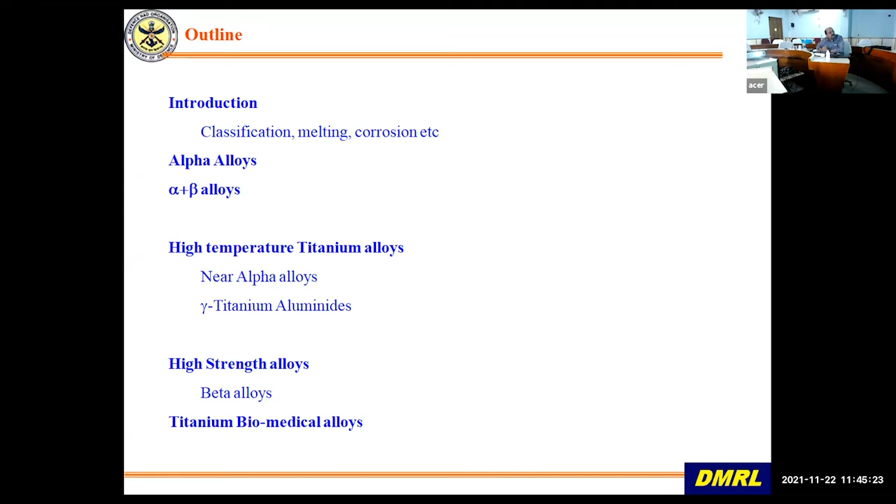And finally, if I have time, I will also briefly introduce titanium biomedical alloys, because that is also one field of research which is coming up.

As far as titanium goes, it has two principal virtues: high strength to weight ratio and good corrosion resistance. That is the reason you find applications in lot of industries like aerospace, including airframes and engine components. Due to its good corrosion resistance, it also finds usage in marine, chemical, and biomedical applications.

There are certain other niche applications which are not very common, but still they are there, in industries like aerospace, medical, industrial, and certain specialist industries which are coming up, like body jewelry, marine, bicycle, and also sports equipment.

As far as the percentage usage goes, non-aerospace accounts for 47% of the total production, and aerospace is 53% of the total titanium alloys.

As far as titanium goes, it is basically extracted from its oxide, which is available a lot in the Kerala beach sands, and this titanium oxide is very stable. As a mineral, it occurs as rutile and ilmenite.

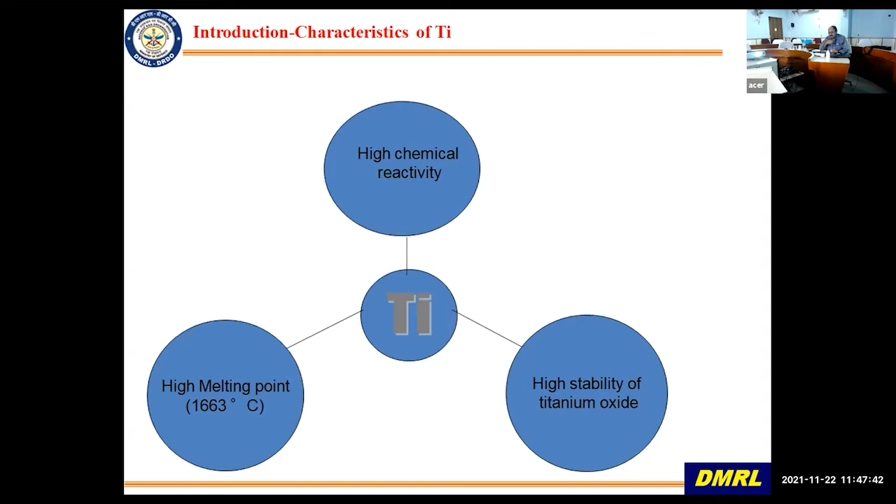This technology in India has been developed by DMRL, and now a plant has been set up in Chavara, Kerala, with a capacity of 500 tons per annum, where titanium sponge is being produced.

Now, coming back to the titanium alloys, here I'm just showing you how the classification is done. The alloying elements are basically divided into two categories: the alpha stabilizers and the beta stabilizers.

Coming to beta stabilizers, there are two kinds: beta isomorphous, which are elements like vanadium, moly, niobium, tantalum, tungsten, and beta eutectoid stabilizers like iron, chromium, nickel. And among the gaseous elements, hydrogen is the element which stabilizes the beta phase.

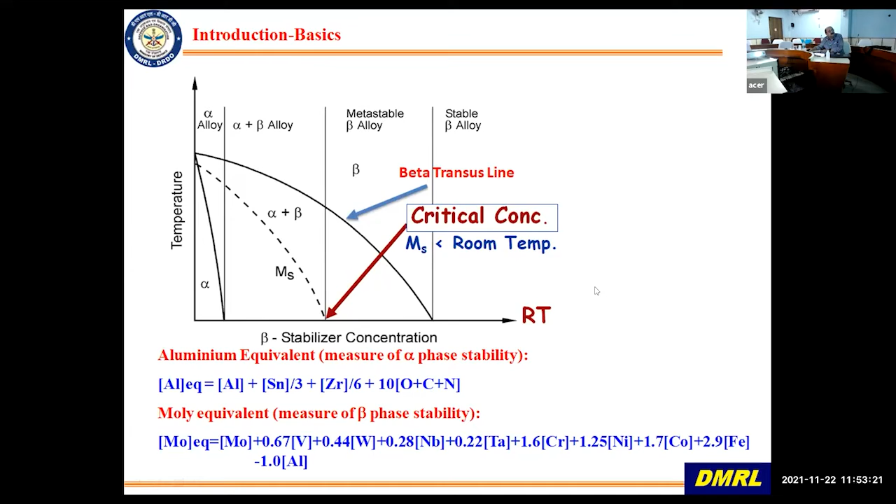So here again I'm showing you examples of certain commercial alloys. All the alpha alloys like 5 aluminium, 2.5 tin, and there is also commercial purity titanium, which is an alpha alloy. Then there are other examples of alpha alloys, and in this category, alpha plus beta alloys, which you can see. I will show you again.

One of the important alloys I should point out is Ti-6 Aluminium-4 Vanadium, which is an alpha beta alloy, and around 50% of world titanium production is of this alloy, because it is medium temperature capable with good strength, and it is used widely in many places. Then you have the metastable beta alloy, Titanium, 10 Vanadium, 2 Iron, 3 Aluminium. Then there are other alloys also.

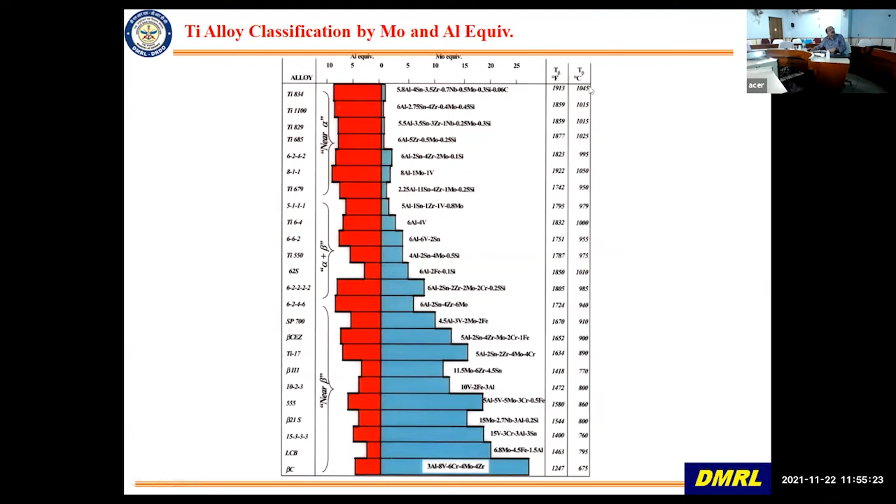So on the top side, you have the near alpha alloys, which is a subcategory of alpha plus beta alloys. This category we'll be talking about in detail. This is part of the alpha plus beta alloy. You can see you have a higher aluminium equivalent and a very small amount of beta phase in the near alpha alloys. Then as you go down, the amount of alpha stabilization decreases and beta stabilization increases. Also, the beta transus temperatures are indicated here for several commercial alloys. You can see that as you come down from near alpha alloys to beta alloys, the beta transus temperature is also roughly going down.

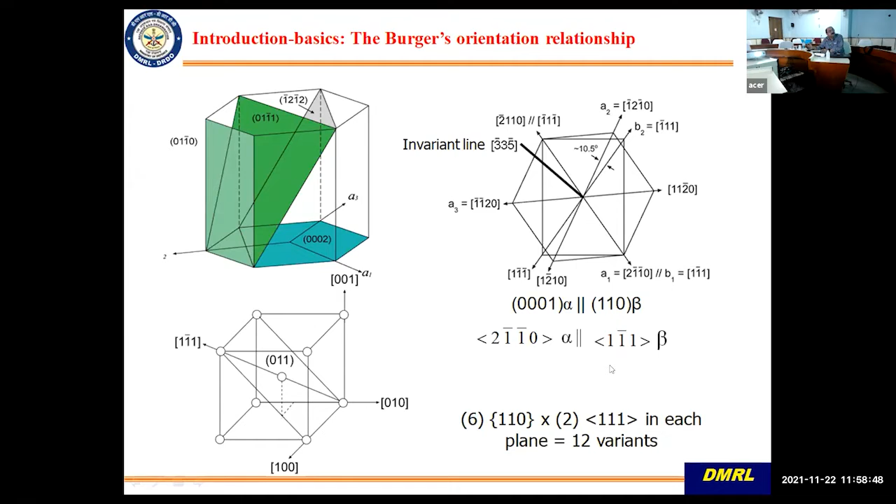Now I'll introduce some of the heat treatments. First is homogenization heat treatment, normally done to all solidified ingots. It is heated high up in the beta phase regime, around 1100, mostly higher than 1100 to 1200, 1250 or so, basically to homogenize it and prepare it for forging. If there is any chemical inhomogeneity, it also evens out. Time and temperature are decided depending on the alloy and other factors.

As far as solution treatments are concerned, there are two kinds. One is beta solution treatment, normally carried out in the lower beta phase regime, but still in the beta phase. Then there is alpha plus beta solution treatment, carried out in the alpha plus beta regime.

Then you have aging, which again is carried out in the alpha plus beta regime, but lower down in temperature, roughly 500 and below. It can go up to 600, but it is normally at lower temperatures.

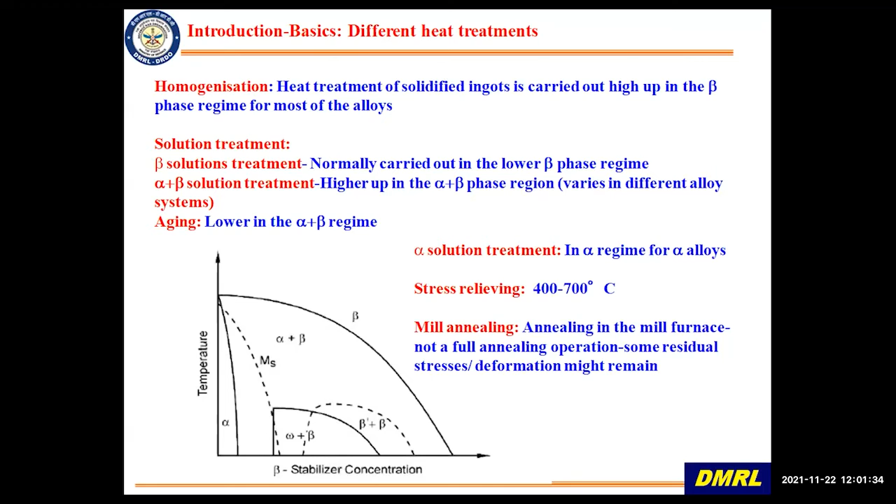The other important thing you should all know is the globularization of alpha in titanium alloys. As I told you, alpha occurs alongside beta, and they occur as needles, or depending on the cooling rate, they will be thicker or thinner.

This is a very important treatment. Suppose you want to convert alpha from the lamellar structure to a globular structure, it cannot be done just by heat treatment as in steel. Normally it occurs as laths, like martensitic laths in steel, with alpha and very thin beta around it. So what you have to do is perform deformation in the alpha plus beta temperature regime, when formation of slip bands occurs.

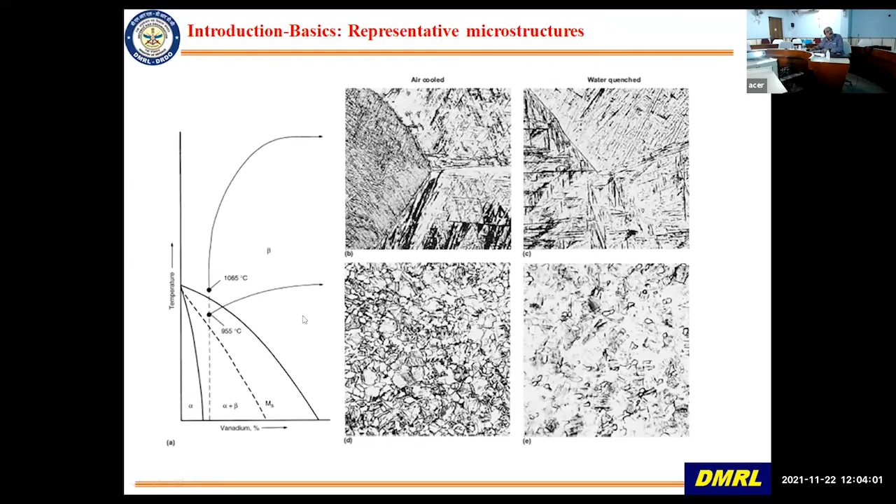Now here again, with Ti6Al4V, when you beta heat treat and cool from the beta region, you get this kind of colony structure. You can see different colonies of alpha and the geometric pattern. This bright thin layer is beta, and the darker regions in between are alpha.

You can also see grain boundary alpha formation, because grain boundaries are high energy regions, and alpha first precipitates on these boundaries, which deteriorates the mechanical properties. So you have to take care of it.

Now if you give deformation to this beta treated material in the alpha plus beta regime, and then cool very slowly, what you get is an equiax structure. You can see dark colored alpha and continuous beta lining the boundaries. This kind of microstructure is very good for superplastic forming applications or forming applications in general.

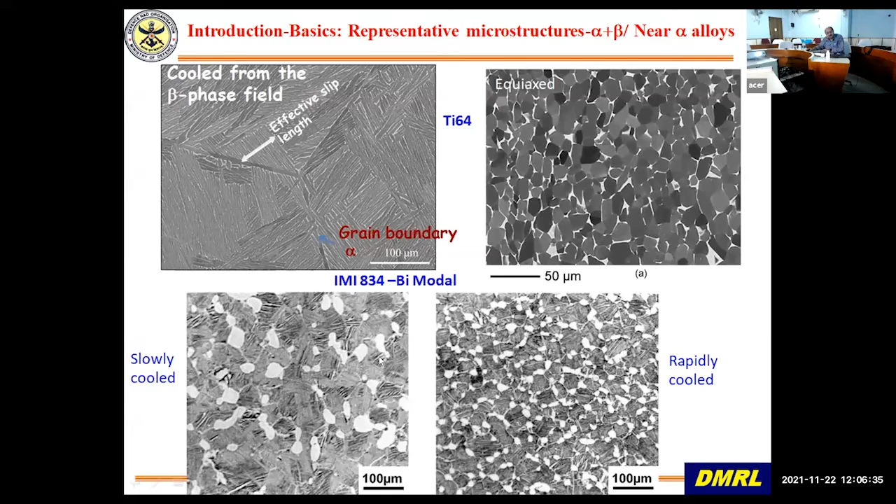Now I will just briefly talk about how melting is done, because some of you might not know. That is why I thought I'll go through the basics and then go on to the main topic. Titanium picks up oxygen and nitrogen, etc., that is present in the atmosphere.

So it has to be melted in vacuum. What you do is melt it in a vacuum arc remelting furnace. You make an electrode, and there is a water cooled stinger rod to which you attach the electrode, and then you have a water cooled copper crucible with water around it, and a stirring coil around it.

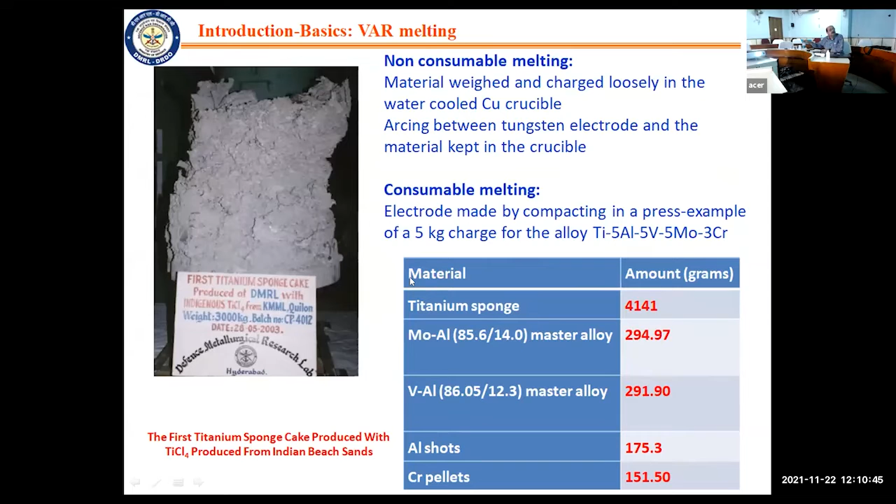The other important thing about titanium is it has got very good corrosion resistance because it exists at the noble end of the galvanic series. This is a galvanic series in seawater, and titanium exists towards the noble end.

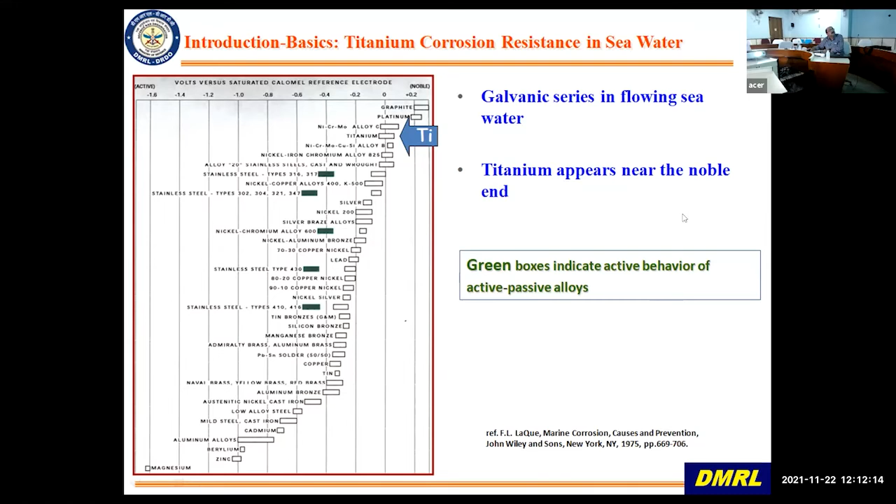Just like aluminium, it forms an oxide layer which protects. Although this oxide layer is not as tenacious as aluminium's, it still protects. So it has got very good corrosion resistance, that is why it is used in a lot of marine applications and also chemical industries.

Now, as I told, the thin protective layer of TiO2 on the surface forms and protects it, but it is good in oxidizing environments, that is in chlorides, hypochlorite, sulfates, and chromic acid solutions, but is not as good in reducing environments like sulfuric acid, hydrochloric acid, phosphoric acids, etc.

And in order to improve it, you can do palladium additions, which increases the corrosion resistance.

Titanium and titanium alloys are slightly different as compared to steel, because they are melted in vacuum and the materials are very pure, with no inclusions. So there is no pitting corrosion that happens. But local chemistry changes can dominate the corrosion behavior, and you can have crevice corrosion. I will just briefly show you that.

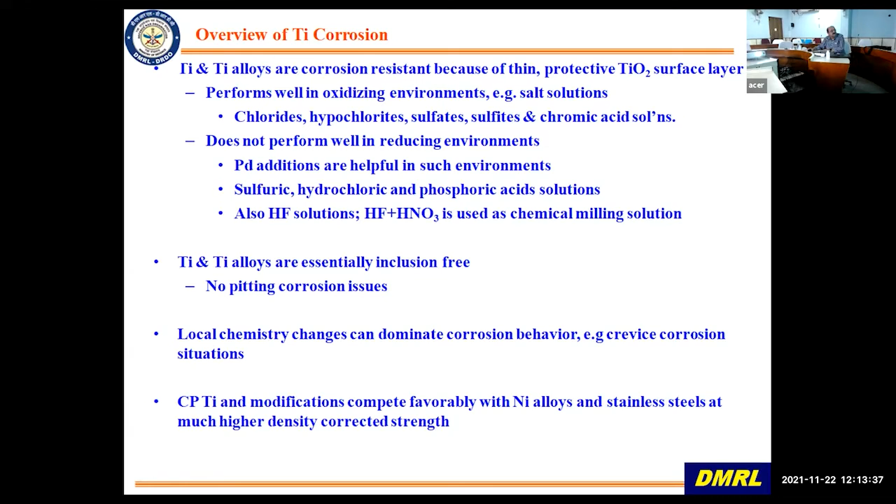CP, commercial purity titanium, with additions like palladium etc., competes very well with nickel based alloys and also stainless steel as far as density corrected strength is concerned. But the titanium alloys are quite prone to crevice corrosion.

That is, all the alloys that have a thin protective layer - when you put two surfaces together in close contact, and there's a liquid environment, a cell can form and corrosion can start, because this cell does break down the film, and that creates what is called crevice corrosion. So titanium is prone to crevice corrosion, but other kinds of corrosion are less in titanium. So you don't have rusting of titanium as in steel or iron.

Now coming to the alpha titanium alloys class. These have moderate strength and good fabricability because they are single phase, and have got very good corrosion resistance. Certain modifications have been done, which I already pointed out, like palladium bearing alloys which are good for reducing environments.

So there are usages like making electrodes in electrolytic baths, or electrowinning of some materials. These titanium electrodes are used.

As far as the grades go, there are about 16 grades of commercial purity titanium and alpha titanium alloys in the US and other industrial countries. These alloys, being single phase alloys, are non-heat treatable - that is, you don't gain strength by heat treating. But certainly you can do stress relieving and all.

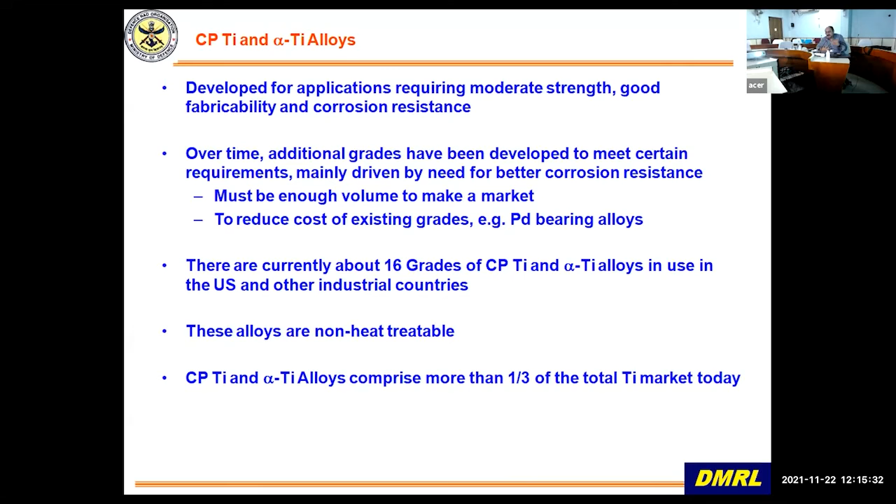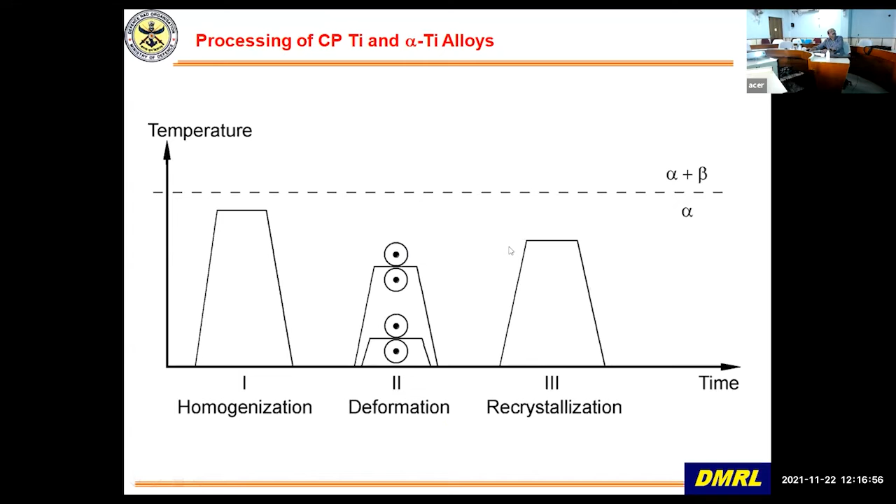I will show you how the alpha titanium alloys are processed. It is homogenized high up in the alpha regime only, then deformed in the alpha regime, and then recrystallized again in the alpha regime, slightly higher than the deformation temperature. That is how these alpha alloys are processed - completely processed in the alpha regime.

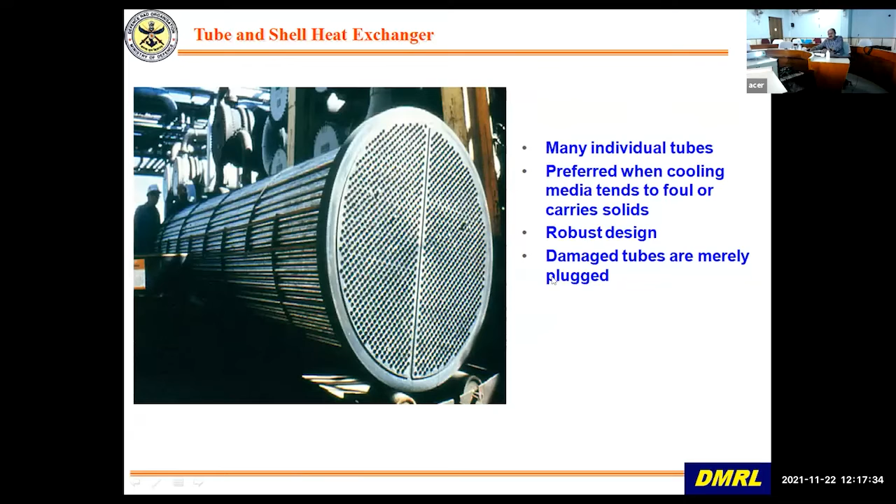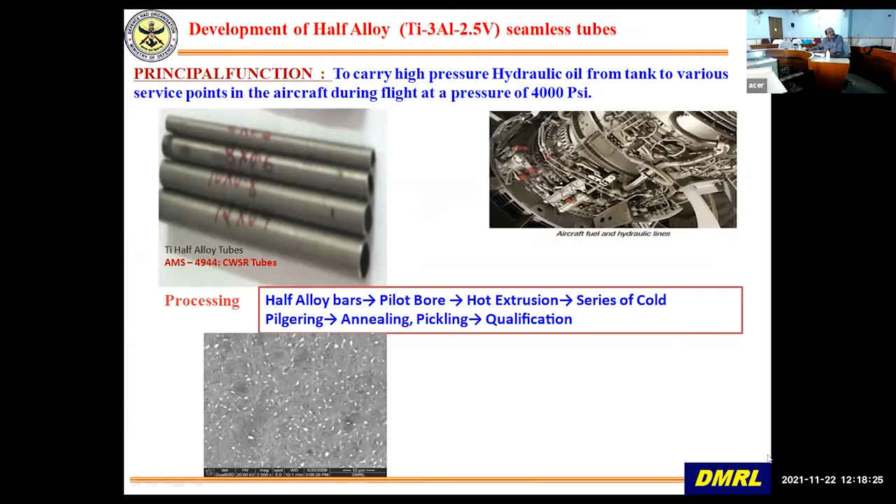This is used for hydraulic oil carrier tubes in aircraft. You can see there are miles and miles of these tubes in an aircraft, with various thicknesses and diameters used, and produced indigenously also within Midhani and NFC, which makes tubes. This is how it is processed: half alloy bars are melted, then pilot bored, hot extruded, series of cold pilgering, annealing, pickling, and then qualification tests are done. Just showing you the tubes of various diameter and thicknesses.

Now, I'm not going into too much detail of alpha alloys. Then comes the bigger category of alpha plus beta alloys. Here are some examples of the alpha plus beta alloys.

This alloy, for example Ti6Al4V, comes in two grades. One is the normal grade, which has got higher amount of oxygen, and then a grade which is called the 6,4 ELI, which has got lower amount of oxygen, 1300 ppm of oxygen. This is for formability and cryogenic applications.

Then comes the category of high temperature titanium alloys, which are near alpha alloys. 6242 is one of the high temperature titanium alloys that Americans use, and for the Kaveri engine program we have indigenized this alloy. This is a slightly later and more complex alloy, and it has also got higher temperature capability as compared to the other one.

This can be used up to a maximum of 500 to 525 degrees centigrade, while this other one can go up to a maximum of 550 to 600 degrees centigrade temperature. These are older generation alloys: 811, IMI 685, which was used in older engines, etc.

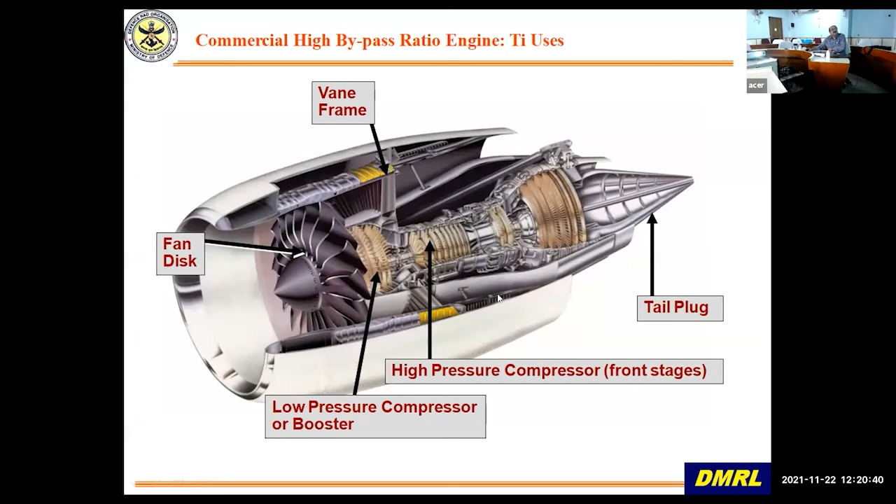Nowadays I will talk briefly about aluminides. They come in here, and these aluminides, which are intermetallics, can replace nickel-based superalloys. Otherwise these are nickel-based superalloys. Then there are certain alloys which can be used for engine tail plugs also.

How is this alpha plus beta alloy produced? These are processed. Just one second, let me check if I can hide this.

The ingot, as I told you, is heated up high in the beta phase regime. That is called homogenization. Then you can cool at different rates. Deformation is first carried out in the beta and then in the alpha plus beta regime if you want a bimodal kind of structure. Otherwise, if you want a beta treated structure, you can just do deformation here and then annealing or recrystallization here to get a beta treated structure. But if you want a bimodal structure and want to refine the grain size, you deform in the alpha plus beta regime and then carry out recrystallization and annealing again in the alpha plus beta regime, and then a final aging or annealing much lower down to get higher strengths.

So here again is the same microstructure. This is a beta treated structure, it has got big beta grains because the diffusivity in beta or BCC is higher, so you get large grains. Whereas in equiax or bimodal structure, you get much finer grain size. So for fatigue kind of applications, this kind of microstructure is much better, and this kind of equiax microstructure is good for formability applications.

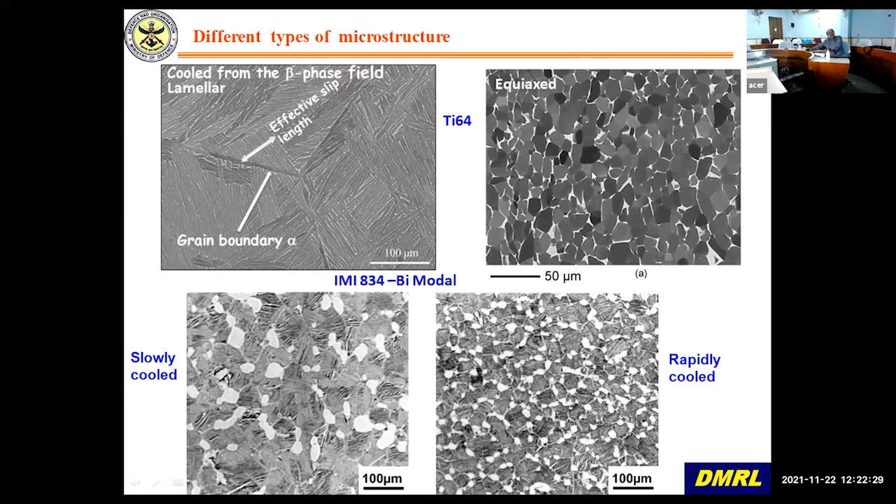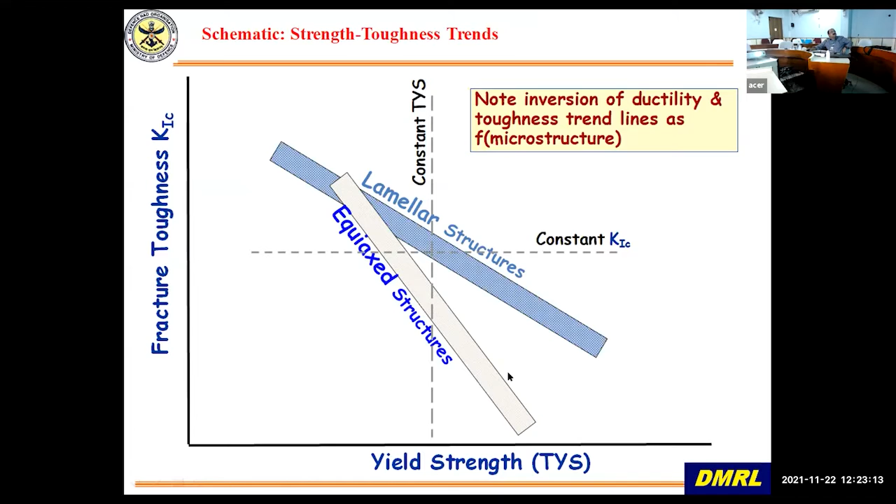Now coming to near alpha high temperature titanium alloys, because these exist toward the left hand side of the alpha plus beta phase diagram, what is the design philosophy for high temperature? We are mainly looking for creep and oxidation resistance. So what you have to do is basically limit the beta phase volume fraction, because beta phase, being BCC, has higher diffusivities, giving worse creep properties. So you have to decrease the beta phase content, normally kept less than 10 volume percent, which is why you have to have lower beta stabilizer content.

Then how do you strengthen it? You add neutral elements, tin and zirconium.

Tin combines with aluminium, and it can also precipitate alpha 2, which is the ordered Ti3Al structure, which increases the strength, high temperature strength and all. So it is good for that also.

As I told you, you replace the higher diffusivity beta stabilizer. You have to add a certain amount of beta stabilizer. Instead of using vanadium, you can use moly or niobium, which have higher melting points and lower diffusivities. That is why in high temperature titanium alloys, you will see more of moly and niobium.

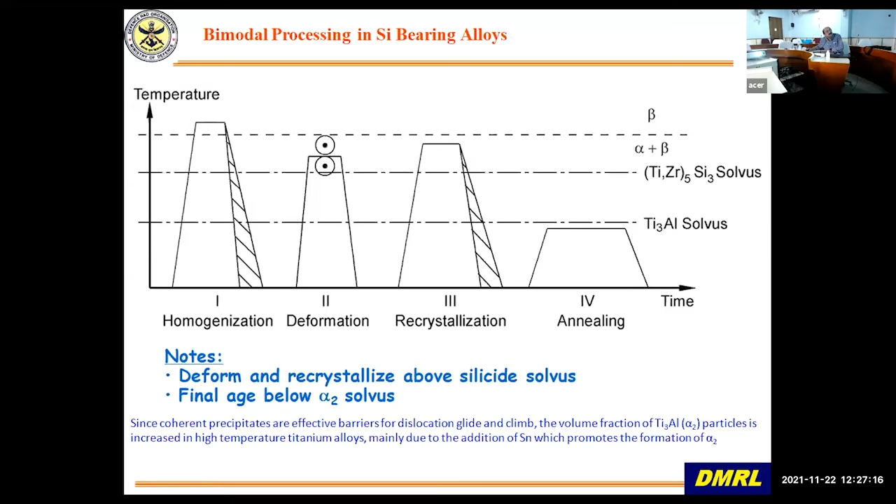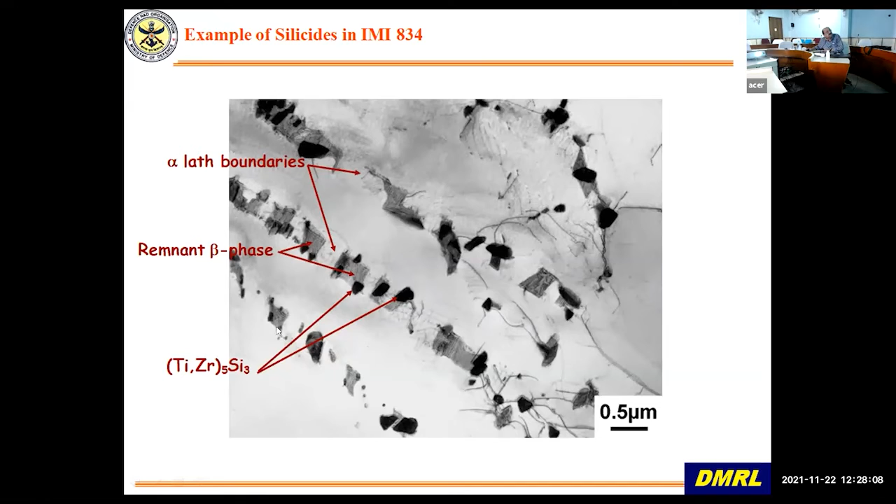That is why in most high temperature titanium alloys, you will have silicon as one of the additions. It improves the high temperature creep property.

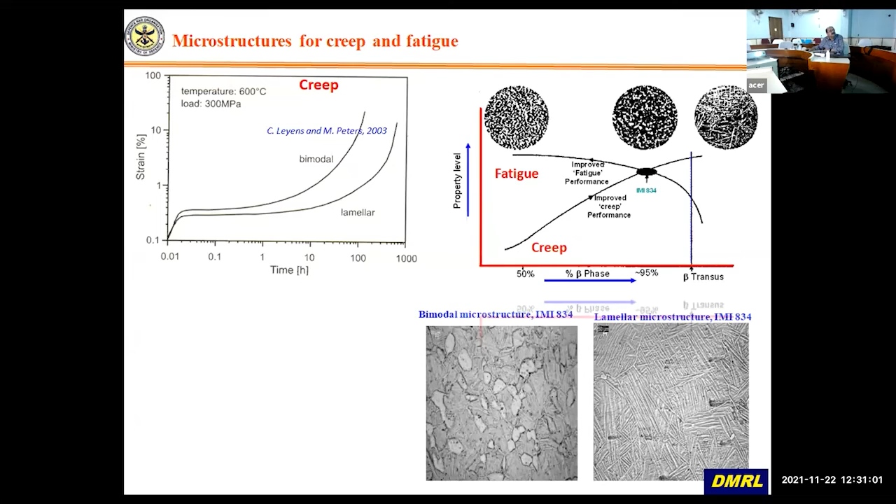Now, for applications like blades, where you have higher temperature and also rotating conditions, you have to have a good combination of creep and fatigue. That is why a bimodal microstructure is a compromise. You have optimized the bimodal microstructure to have good optimum amounts of creep and fatigue. So this is a beta treated lamellar structure, and this is a bimodal structure. The bimodal structure is what is used for compressor sections, for making blades and other rings, etc. So here I'm showing you why you want a bimodal kind of microstructure.

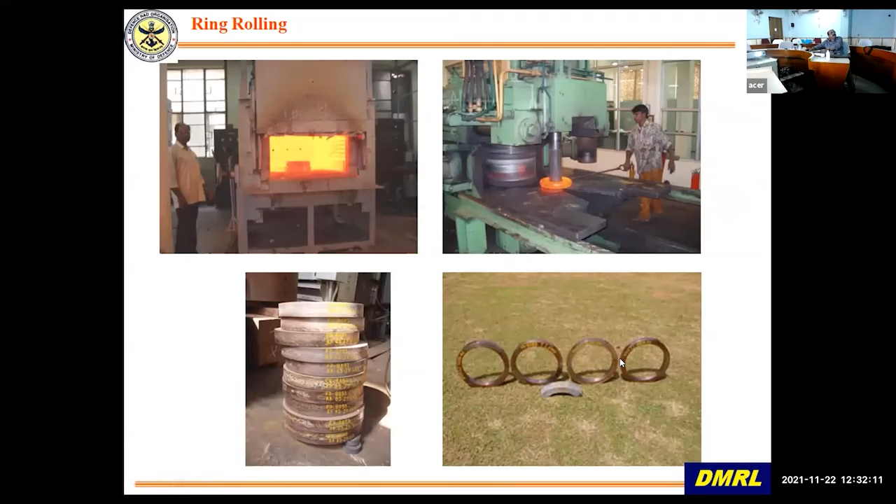Here I'm showing you the IMI834 rings that were made for the compressor section of the Kaveri engine, for the Kaveri engine program. Billets were made, and then from that rings were made by ring rolling. And then rods were made, forged gradually, and these compressor blades were made of this high temperature IMI834. Now I will show you the effect of processing microstructure and also on dwell fatigue.

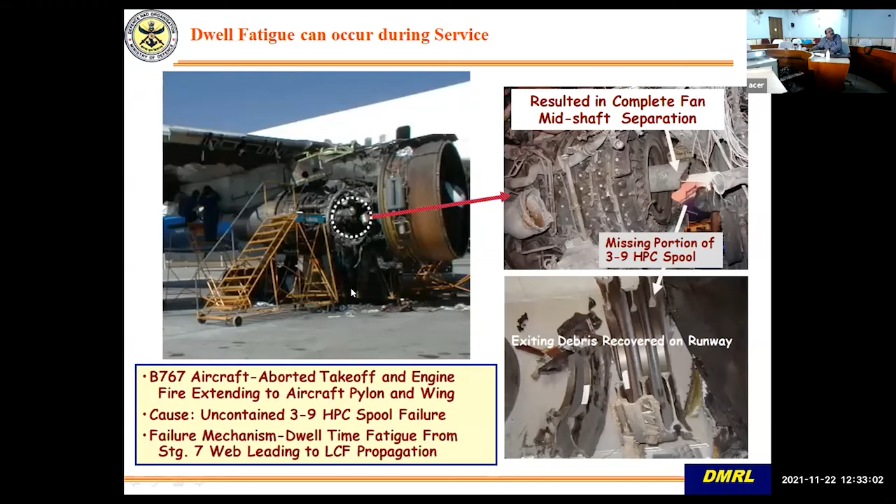This is an important new phenomena called dwell fatigue. I will tell you what dwell fatigue is. You have heard about fatigue, which is just cycling the load. But when you hold a load for a constant period of time at a higher load level, that is called a dwell period. People have realized that because of this dwell effect, cracks have been generated, and there have been failures in engines, and this has been reported. We will discuss this phenomena because it is interesting.

Why am I talking about Ti6Al? Because this is the common unit in all high temperature titanium alloys. That is why this is important.

Now, what happens is, as compared to fatigue, in dwell fatigue you hold a load for a certain amount of time at the highest stress, and then the crack forms. There has been an explanation given by Bache et al., which still holds good, although a lot of research is going on in this. People have found that dwell fatigue causes an order of magnitude reduction in fatigue life.

That is, in that, C plus A slip has to be activated. Other slip, critical resolved shear stress does not occur. So what happens is this deforms and unloads onto the hard oriented region, deformation-wise. And this stress adds on to the applied stress, and it causes fracture or cracking. That is how the dwell fatigue crack initiates - adjacent oriented easy slip region deforms and unloads onto this hard oriented region, and this region cracks.

Now, if I take a stress strain curve and try to explain this phenomenon, it is like this. You have the hard oriented region and this region which has lower stress requirement, and then there can be two cases: one is iso stress condition and one is iso strain condition.

So if you take an iso stress condition, the weak grain deforms more as compared to the strong grain. So there is a strain incompatibility which comes in. Now, if you have iso strain condition, the weak grain deforms and the strong grain deforms.

So what happens is, when you apply this stress, the weak grain deforms and basically unloads onto the strong grains, and this is what is called load shedding or unloading, and it causes cracking in the hard oriented region. I will show you this.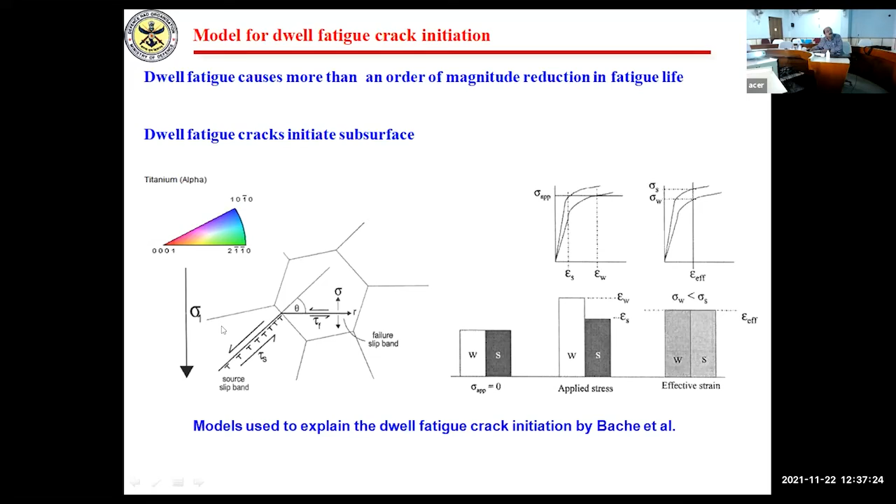Now, for knowing the orientation, nowadays what you have is EBSD, electron backscatter diffraction. It has become very easy to know the orientation. Grain wise, you can focus and see what orientation it is, and you can get an orientation band.

So this is an attachment to a SEM, scanning electron microscope. It has got a camera, and when you orient your material properly, it can generate Kikuchi bands. These are from planes which are there in the crystal or material, and these can be indexed. Very mathematical formulations are there. These can be automatically indexed and give you the orientation of each grain, how it is oriented.

It becomes, so I will show you an example. And why we are talking about this, because we are bothered about the mechanical properties ultimately.

Now, this is an example of how Titan 29A was indigenously produced with DMRL technology. So it was triple melted, 650 mm dia. It was upset forged in the beta phase field to 750 mm dia, then laterally forged in alpha plus beta field to get a 500 mm dia at 450 mm dia billet. Then it was again beta treated and again alpha plus beta processed and got 250 mm dia at 220 mm dia billets. This was used for making discs and rings.

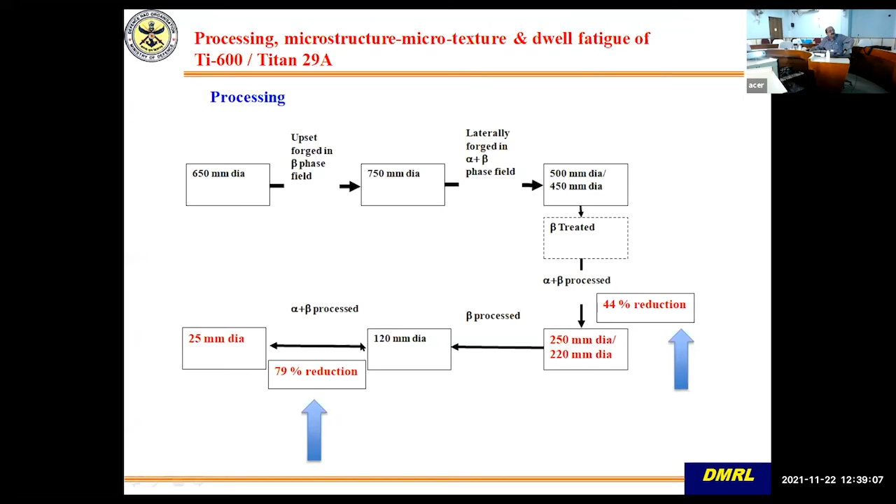So what you see here is around 44% alpha plus beta reduction. Then this was further processed for making 25 mm dia rods for making blades, and it saw around 79% reduction in alpha plus beta processing.

Now I will show you the difference. So this is another example of how you orient your material in the EBSD. You have to take care of your orientation. This is from the next study, part of my postdoctoral research. I will just show you this, but I'm showing you the orientation.

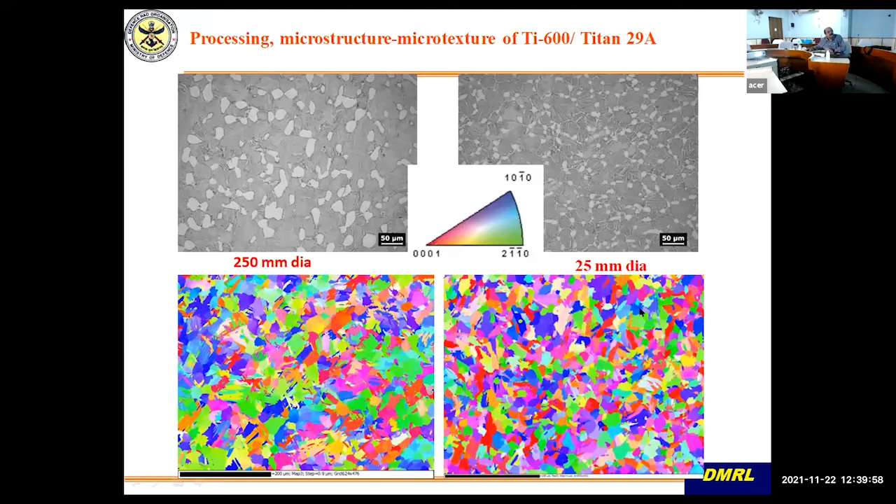Now this is from the Titan 29A that we had processed. You can see this is from the 25 mm dia rods that have been made, and this is from 250 mm dia forged billets. This microstructure is much finer, so it has seen a much higher alpha beta reduction. And orientation wise, there is difference, but you cannot pick it up here. So red means a hard orientation, that is its c-axis is oriented in the loading direction, and the green and blue means easy direction of orientation.

When you test these materials for continuous fatigue, this is how a sawtooth fatigue looks like as compared to the dwell region. This is how a 120-second dwell around 95% of the yield strength looks.

This is the yield strength of both materials. There is a slight difference because this is much finer material, so you get higher yield strength. You can see the difference in number of cycles to continuous failure. This type cycle shows a quite large number of continuous cycles, whereas this shows much lower cycles to failure.

Similarly, if you apply this dwell kind of cycle, you see this result. So there is a debit, right? If you have a hold period, although it is within the elastic regime, you can see the decrease in life. If you divide this number by this number, NC by ND, you get this value, which is called a dwell debit. Now this happens at lower temperature, that is below 200 degrees centigrade.

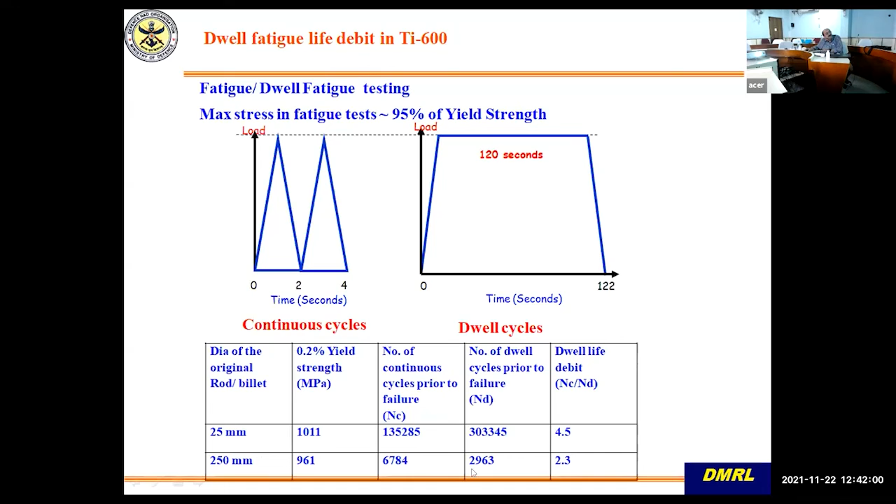Now this is a part of my postdoc work. I just wanted to show you the example. Ti6242 is the material which Americans use, and Ladish is the company which was producing this material. It was produced to give low microtexture material.

These pancakes were produced to give high microtexture. I will show you all these examples. Then two were tested from beta forged condition, and they also checked from retired impellers.

Here most of them were tested at around 95 to 91% of yield strength, with 2-minute dwell time applied. You can see the continuous cycle and the dwell cycles, and the dwell debit is shown here. The material which has got higher microtexture shows higher dwell debit as compared to material which has got lower microtexture.

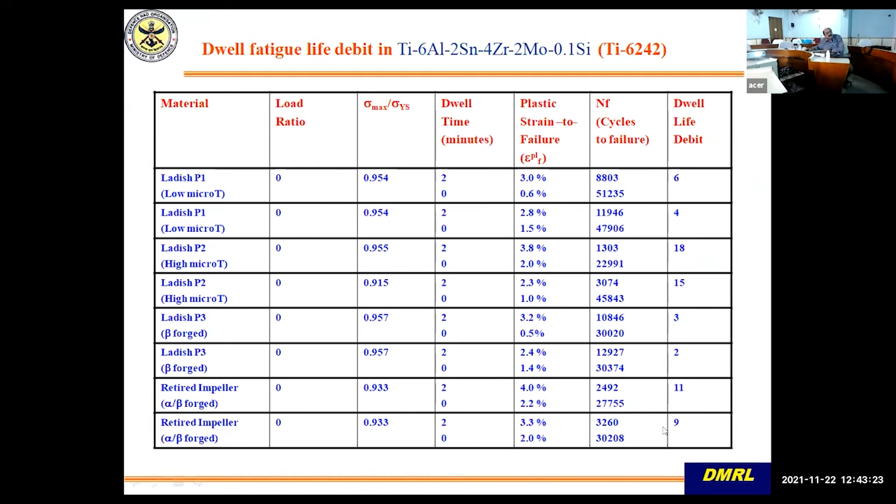Beta forged material, because it has got higher grain size and all, shows lower debit, but it still has other properties which aren't very good. And the retired impeller, which was processed much earlier before microtexture was understood, shows very high debit in titanium alloys, because at that time people did not understand microtexture properly.

Now how were these processed? One was processed with alpha beta forging done at T-beta minus 50, for random microtexture, and then heat treated at T-beta minus 35, oil quenched, and then heat treated.

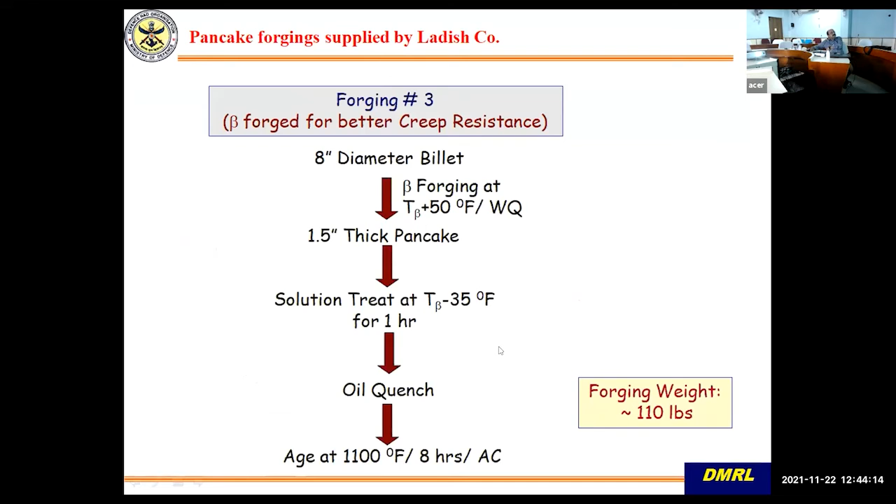Then for higher microtexture, it was forged at T-beta minus 50, but treated at much lower solution treatment temperature to have higher volume fraction, that is T-beta minus 100, then air cooled and aged. Then the beta forged material was processed in the beta condition, and solution treated at T-beta minus 35, oil quenched, and then aged.

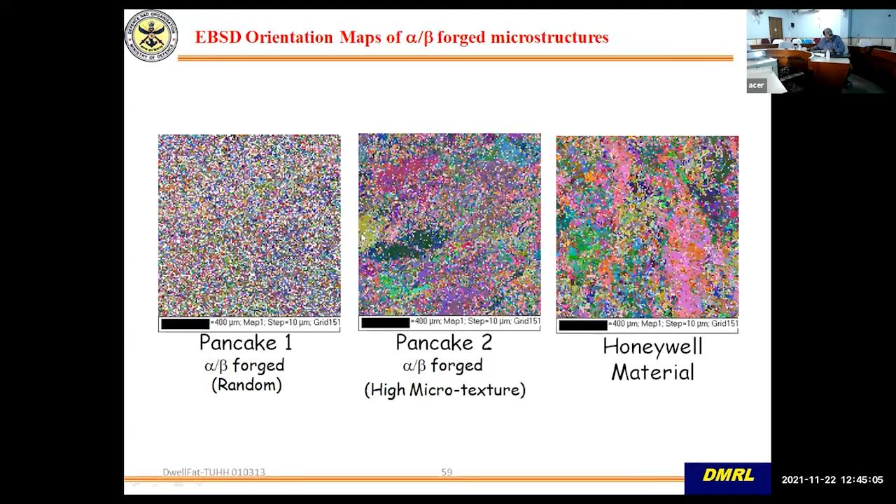So this is pancake one, which is randomized. You can see the color is very even, there is no particular area, no micro texture or dot of color. As compared to that, one which has got higher microtexture, you can see similarly oriented grains in certain regions. This is called microtexture, in macro zones, also seen in the Honeywell material.

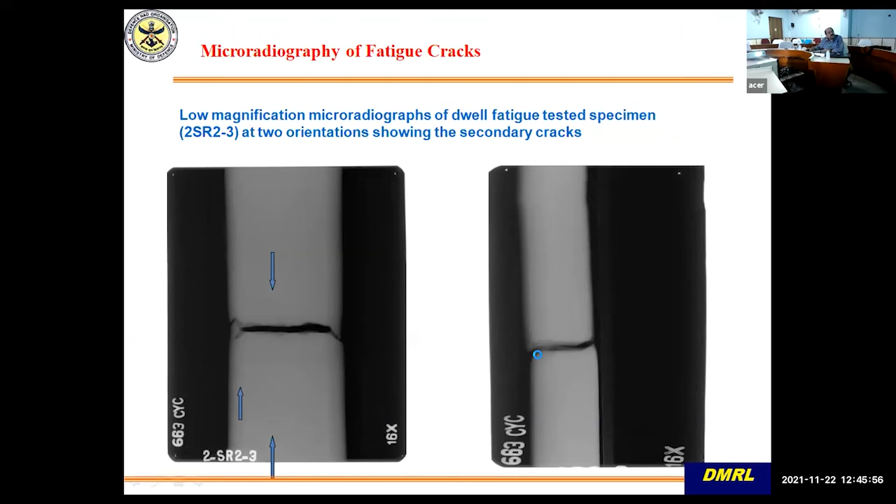This is the main crack, and these are fine secondary cracks. It was imaged in two directions, and my job was to look for texture around the crack. This is a secondary crack. I polished up to the secondary crack and then took the EBSD map.

You can see this is the loading axis in the flat sample. I kept track of this loading direction, and this is the secondary crack I'm showing you. The crack runs fully in the hard region, and as soon as it goes into the soft region - blue and green color indicates soft, deformation-wise soft region - it either meanders, trying to deviate, or it blunts.

Red means hard, that is the C-axis is oriented along the loading axis. So there is no resolved shear stress on the basal plane or on the prismatic plane. Only the C-plus-A hard orientation can deform.

As I told you, these soft regions deform and unload onto the hard region, and these crack. So this is the phenomena, and you can see this crack is fully embedded inside the material. It is not on the surface. And this is the main crack.

Nowadays with EBSD and SEM, you can see this is the flat specimen. The crack initiation region, which is the brittle region, is inside, not on the surface. And you can find out the physical orientation and also know the crystallographic orientation. It is possible nowadays.

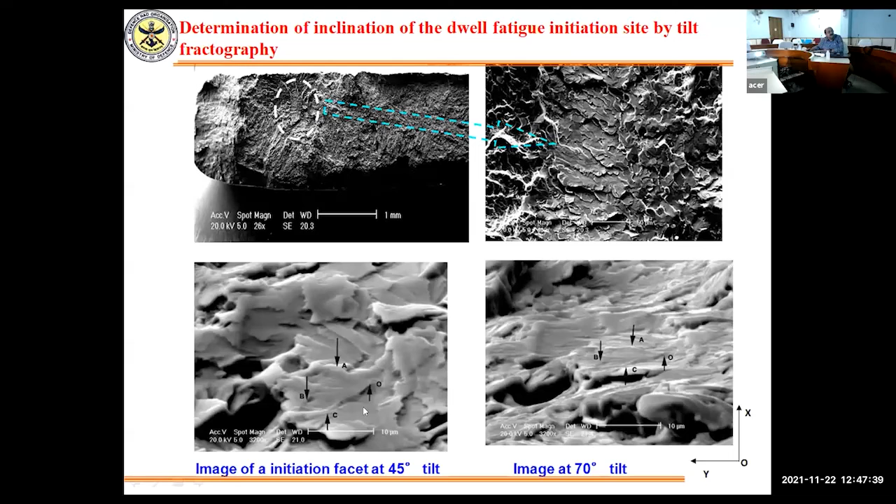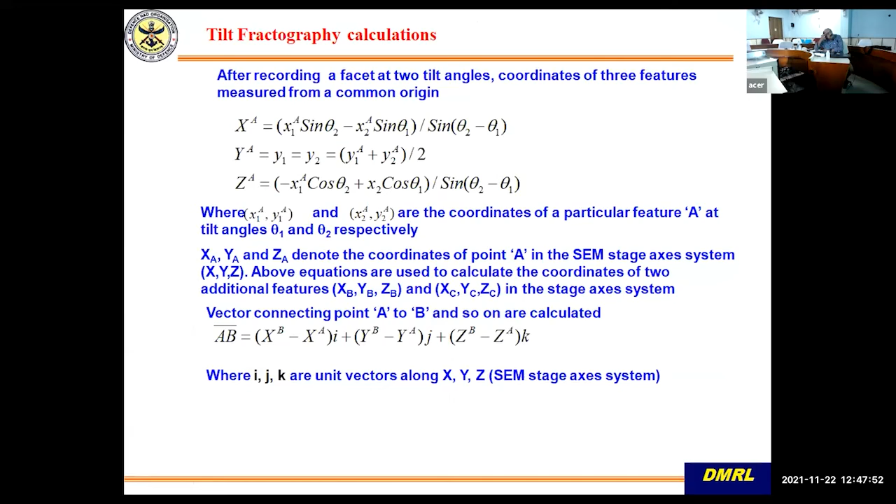So you can do vector calculations, and you can Photoshop it, plug it into these formulas. These are just vector calculations, nothing else - I'm not going into too much detail. You can calculate both the physical orientation and the crystallographic orientation of the facet by pulling out a pattern from the faceted region.

If you plot it, it is the near-basal region as Bache had predicted. So these are the crack initiation regions - that is, the hard orientation regions are the regions which start cracking. That is what this study shows, as also seen in the EBSD around the secondary crack. Even if you analyze the primary crack, the crack initiation region is around the hard orientation.

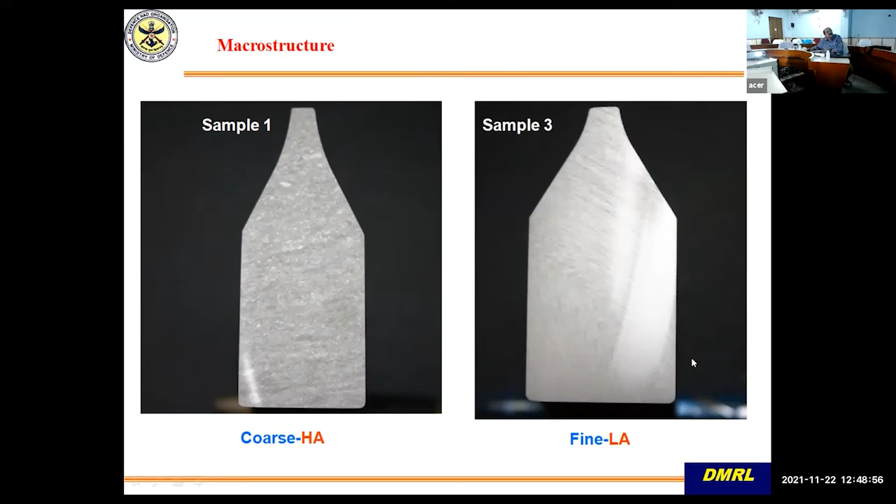Then we were given pieces of rings which were processed differently. When we look at the macro - we etched it and wanted to see if there's a difference macro-wise - there is a slight difference, but not too much. These are again different materials from differently processed rings.

And then ultrasonic attenuation was measured on these. Now, why we were doing this is because there is a lot of material flying around in US engines which were processed before microtexture was understood to affect fatigue and dwell fatigue properties. So they wanted to assess non-destructively whether it is possible to pick out material with higher microtexture versus lower microtexture, because material with lower microtexture is better as far as fatigue and dwell fatigue are concerned.

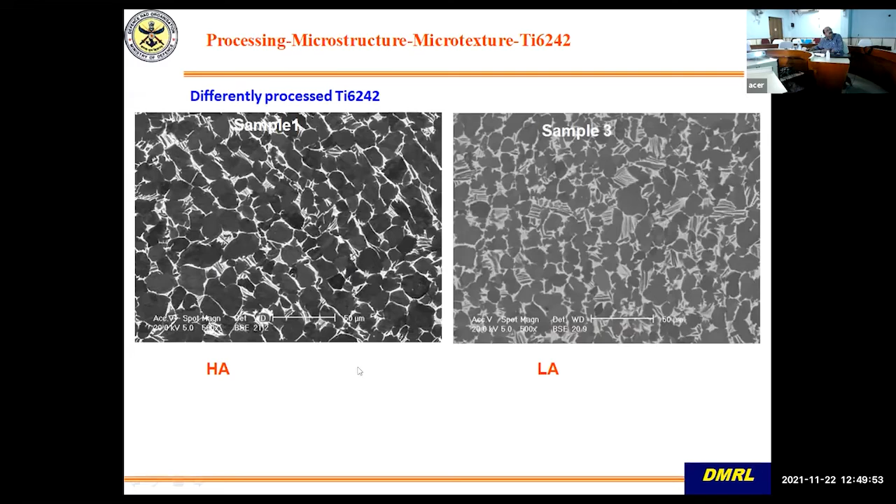So these were the different materials. We took the microstructure, looked at it in SEM - primary alpha, transformed beta. There is a slight difference. These are different materials, sample 1, sample 3. This one has got lower attenuation, this one has got higher attenuation.

But when we do a microtexture scan, you can see that the 4 processed specimens are entirely different. Specimen 1 has got very large regions of similarly oriented material. Specimen 2 also has got this, whereas specimen 3 has got randomized orientation - different grains oriented differently. And this one has got the orientation as stringers running from bottom to top.

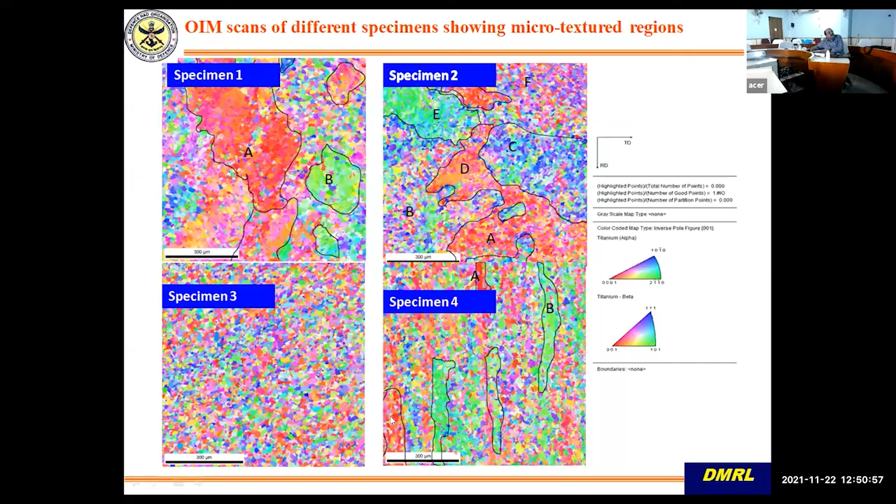So ultrasonic signal was sent in this direction from left to right, and then what I did is I plotted the size of the microtexture region in this direction versus attenuation - that is, non-dimensional microtexture region size versus attenuation.

If you plot it, it matches. The material which has got higher size of microtexture region also gives higher attenuation of ultrasonic signal. So that is how you can segregate the material without cutting.

In this kind of material with elongated grains, if you send the ultrasonic signal in this direction and from top to bottom, the ultrasonic signal attenuation drops. If you send the signal in a direction parallel to this, then attenuation is much higher, because this region is showing higher microtexture. So you can segregate the material based on microtexture.

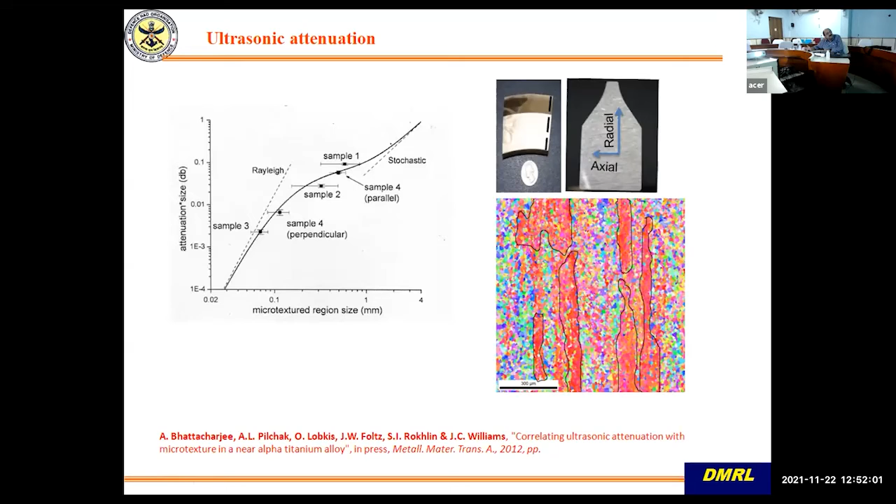Random microstructure, as I told you, will have higher fatigue life and higher dwell fatigue life, so that is better. Now I will switch over to another high temperature titanium material, the gamma aluminides.

I will show you why these are intermetallics. Now these have got very high amounts of aluminium, of the order of more than 40 atom percent. All these compositions are in terms of atom percent rather than weight percent. They have aluminium in the range of 40 to 50 atom percent.

When you add that much aluminium, ordered structures start forming, and you get two kinds of ordering: Ti3Al based ordering and TiAl based ordering. Ti3Al is hexagonally ordered, gamma TiAl is FCT ordered - it has got a different kind of ordering. So you get an ordered material.

Now, because you have added a lot of aluminium, the first thing that happens is it reduces the density. For gamma aluminide, the density is around 3.9, much less as compared to normal titanium alloys, where the normal density is 4.5 grams per centimeter cube. So you have a weight advantage here, and the elastic stiffness also increases.

It is around 170 GPa as compared to near alpha titanium alloys, which have got 120 to 130 GPa elastic modulus. And it has got very good oxidation resistance, high tensile strength, and fatigue strength.

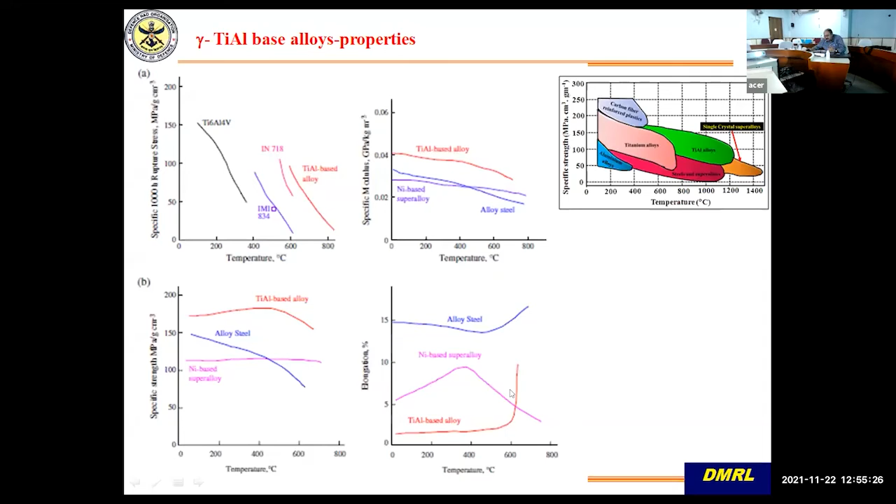Also, the major issue is about ductility. You can see here gamma aluminides, the ductility is almost zero. Only above 600 degrees centigrade does it start improving, and that also only 1, 2, 3%. So the room temperature ductility is very low, and so they have difficulty in processing.

One of the ways of manufacturing is by investment casting. Here I'm showing you the investment casting process: you first make the pattern, then assembly, then the wax pattern, then slurry coat. You build up the slurry coating in different layers, then pour the metal, dry the shell mold, pour the metal, break the shell mold, and then carry out different kinds of inspection to make an investment casting part.

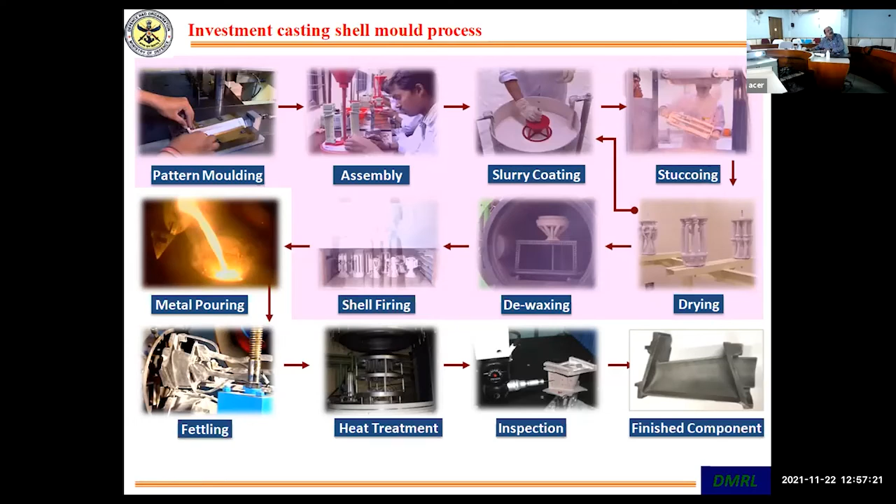Why investment casting? Because these gamma aluminides have got very low ductility, so they are generally investment cast.

So this is us trying to make an investment casting shell. These are Y2O3 sol plus Al2O3 face coat. It is in the initial stages, but we have kind of optimized the shell now. Here are the first few castings of the investment cast material.

Here a processing map of a particular composition was studied, and the region was identified where good microstructure can be obtained, because DRX, dynamic recrystallization, happens if you process in the good region, and that is what we are trying to identify, whether we can also wrought-form certain blades and so on. So there is a lot of scope for research in these areas.

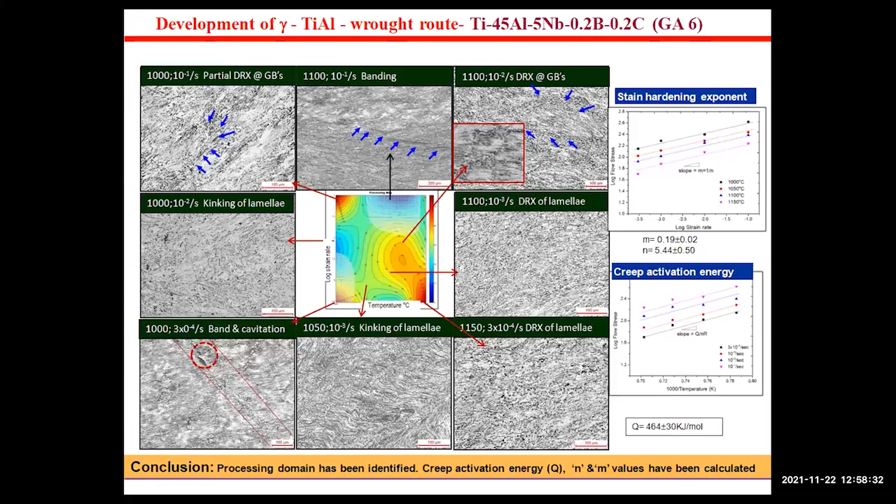Then coming toward the end, I will come to beta titanium alloys, which are high strength titanium alloys, mainly used for strength applications. Now, what are beta alloys?

Beta alloys are basically alloys in which you have sufficient beta stabilizer content, and you can retain the beta phase by cooling at faster rates. Then when you age, you get very fine precipitation of alpha and thereby higher strength.

Mind you, these are not for high temperature application, but for strength applications. So this is, I'm pulling up examples from 10-3 and another alloy, beta 21s, which are located just beyond the martensitic formation line here.

These are having sufficient beta. This alloy has got 10 vanadium, 2 iron, so you can see a lot of beta content in this. Also, you can see a lot of beta moly as well as niobium, etc., are there.

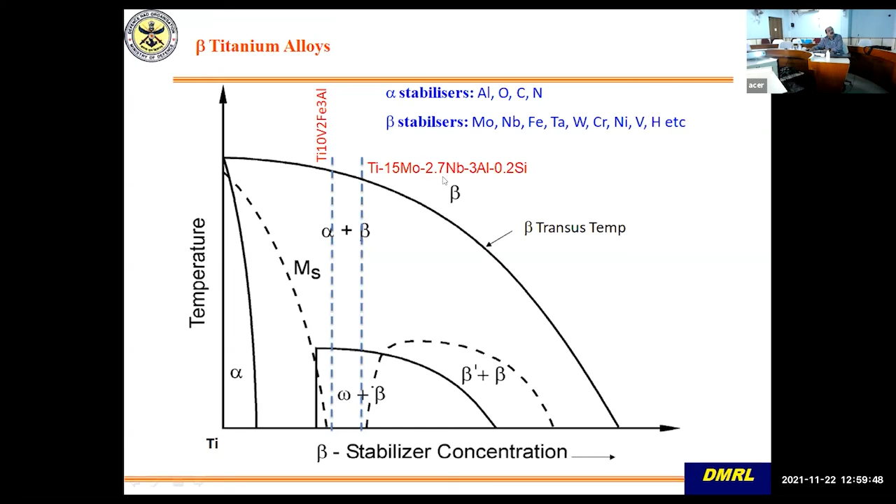Now, these are some examples of commercial beta titanium alloys. 5553 is one composition of interest to us because it can be used for making components with higher section size thickness. 10-3 we have just indigenously produced, it was there in the news, and it is being used in the LCA and other aircraft programs for making several components of the aircraft to replace

steels, so it has got corrosion resistance, and this 10-3 is a well-established alloy abroad, but we have indigenously produced it. And this is beta 21, a sheet alloy, very good for sheet kind of application. There are other compositions which are there.

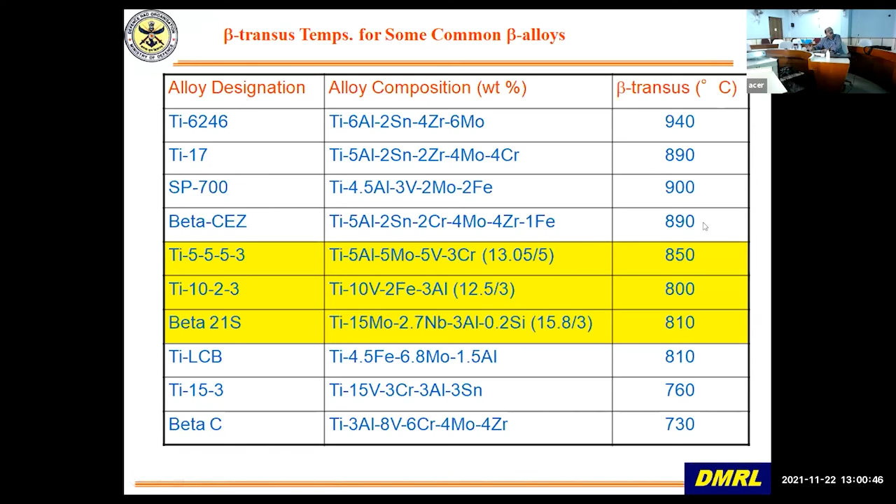You can see the beta transus temperature of these alloys is much lower as compared to near alpha titanium alloys, which is normally around 1000 degrees or more.

So what are the applications? High strength fasteners, helicopter rotors, aircraft landing gear. Because these beta alloys have also got lower modulus, they can store energy, so are used for making springs, especially in aircraft where price is not a problem.

Then there are different aircraft structures, then oil field applications, especially in sour gas application. Then engine tail plugs, one of the alloys like beta 21s can be used, which has got good oxidation resistance as well as good high temperature properties. Although beta alloys are not usually used for this, this alloy has especially been designed with silicon addition.

And then there is a whole class of alloys because they have lower modulus, they kind of match the bone modulus, so for orthopedic implants, etc., people are moving on from Ti-6-4 to these alloys. So this is, I'm showing you the aircraft structures, springs which are there, the beta alloys are widely used there.

This is an example of 10-3 forging. You can see a person sitting on one of the landing gears, part of the landing gear. This is steel, but the other parts are made of 10-3, which reduces the weight. Although initial costs are higher, because it has got corrosion resistance and does not corrode, lifetime costs are lower for these alloys.

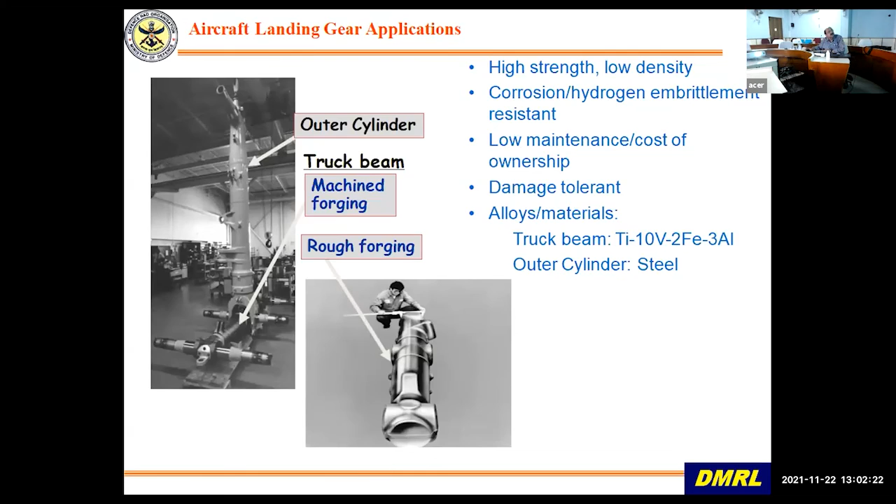Now here again, helicopter rotor mast rotors are also made of these kinds of 10-3 like alloys.

Now we have indigenized 10-3, but I would just want to point out the problems that can be there. You have to have proper melting, master alloys, etc. Otherwise proper melting technique, otherwise you'll end up with problems.

Now we started off with 85 vanadium, 15 aluminum, used iron powder and aluminum shot, and a triple melt was taken, 2.8 ton. That resulted in higher oxygen and also segregation of iron. These are called beta flecks. I will show you this.

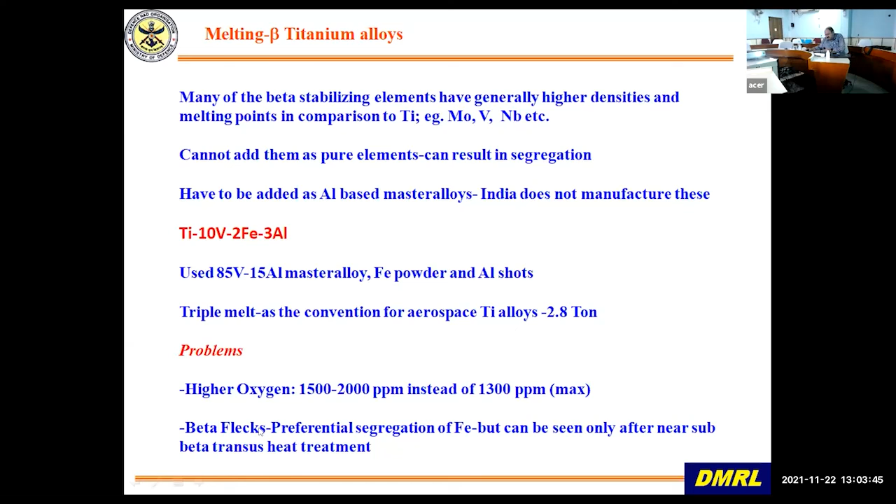Then what we did is we used a different kind of master alloy, a ternary master alloy, which reduced the iron powder addition. The oxygen was coming because of the iron powder, so only a limited amount of iron powder was used, and we switched over from triple melt to double melt to reduce the beta fleck problem. Size of the ingot was reduced, and melting from triple melting was reduced to lessen the beta fleck problem. So that is how this problem was solved.

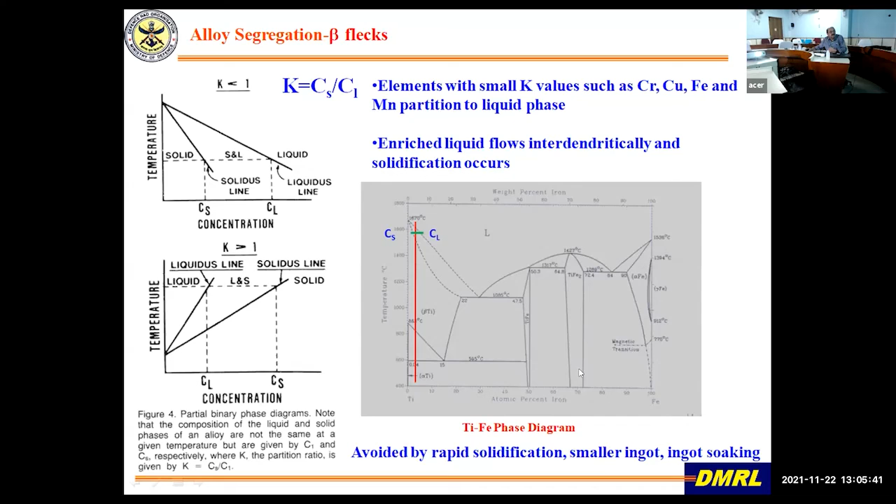Now if this is less than 1, then as you cool, because solidification is a non-equilibrium phenomena industrially, this type of alloying addition gets rejected in the liquid and it segregates. Now this is the titanium-iron phase diagram. You can see there is a deep eutectic. So this is Cs, this is Cl. So iron gets rejected into the liquid, and you have segregation of iron. In certain regions you have preferential iron, and that causes problems. So this can be avoided by rapid solidification, smaller ingot, and ingot soaking.

Now why this happens is because when you heat treat just below the beta transus, around 800 degrees centigrade, you have to heat treat around 780, 770 or so, because you also want a good combination of fracture toughness. If you go too much below, you will have too much primary alpha and you will not get very good fracture toughness, so that also we optimize. So around this point, when you do the local region, the beta transus, as you saw, is lower as compared to the other region. So this crosses the beta transus temperature, and you get big beta grains as compared to the other region.

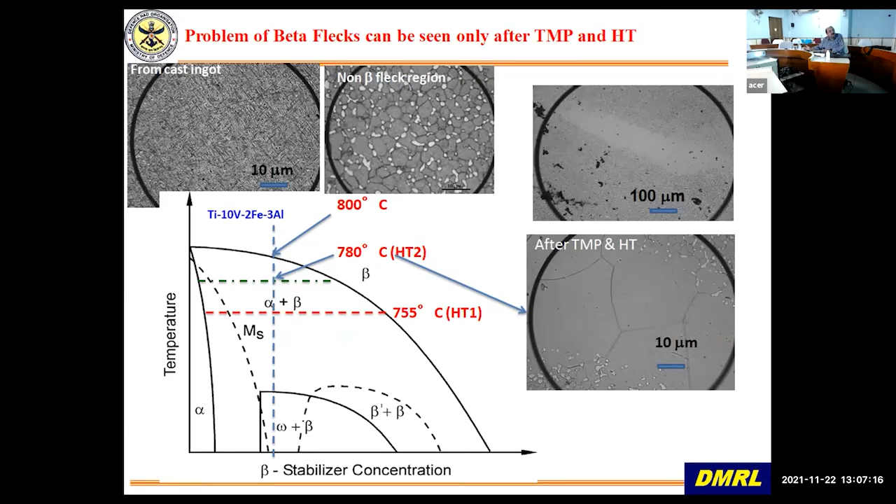So that is the problem if you have this beta fleck problem. Now for beta alloys, the problem is that because the processing temperatures are lower, you have to hit the right window for processing.

Otherwise, you will get a non-uniform structure and you will not get good mechanical properties. So you have to hit the right window, because the temperature, strain rate, deformation, everything has to fall in place. That is why processing these materials is not very easy. You have to hit the right window, and that you have to identify by doing research and processing.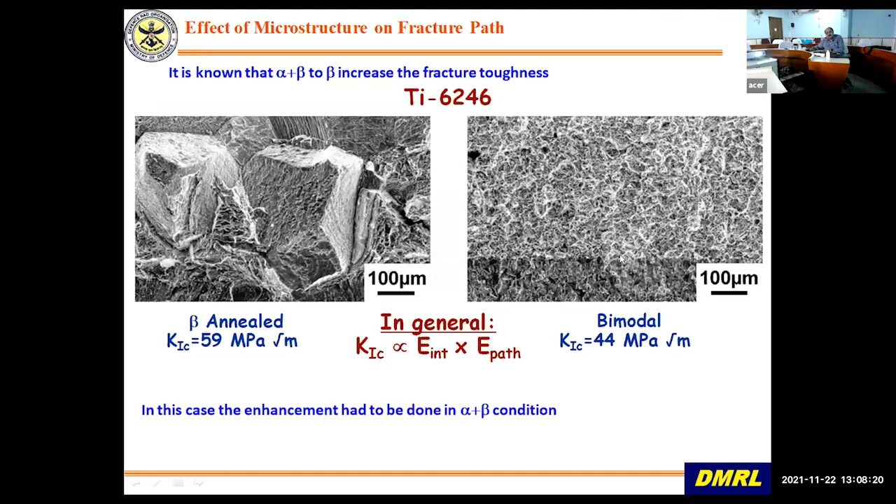It is very easy, as I told you, to improve fracture toughness in a beta treated material, but in a bimodal material, it is not very easy to increase the fracture toughness. Nonetheless, it was done by changing the solution treatment and aging temperature, because you are changing the primary alpha volume content, and thereby when you age, you are increasing the secondary alpha precipitation, and you can see the jump in fracture toughness which we could get.

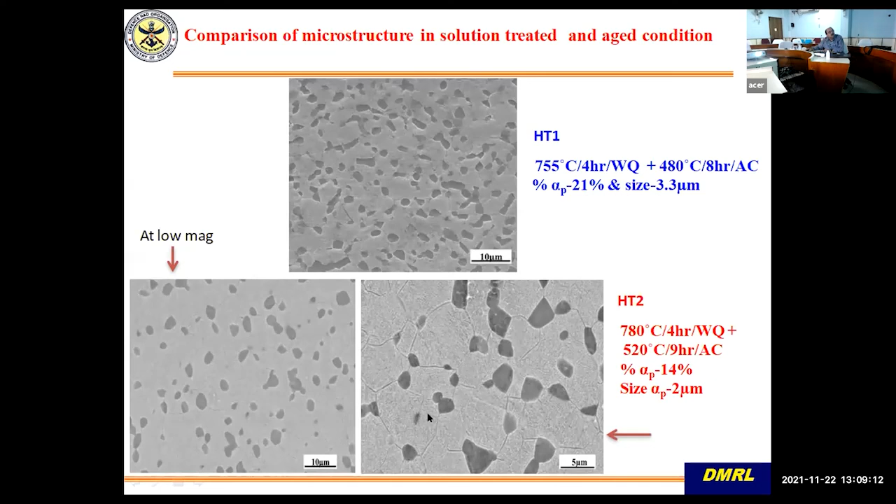Here I am showing you the microstructure. First heat treatment, you can see the higher amount of primary alpha, and this is very fine secondary alpha, which you can see in the second. So this heat treatment has got lower volume fraction of primary alpha, the dark colored, and coarser secondary alpha. This is what gives you strength. So this improves the fracture toughness.

And then we are also working on the development of the sheet alloy. This is much better than 15333, etc. This has got higher beta 21S, which has got good oxidation resistance and creep resistance. Although beta alloys are not supposed to have good creep resistance, but it is comparable to Ti64. As you can see, tail plug, etc. of this material is used.

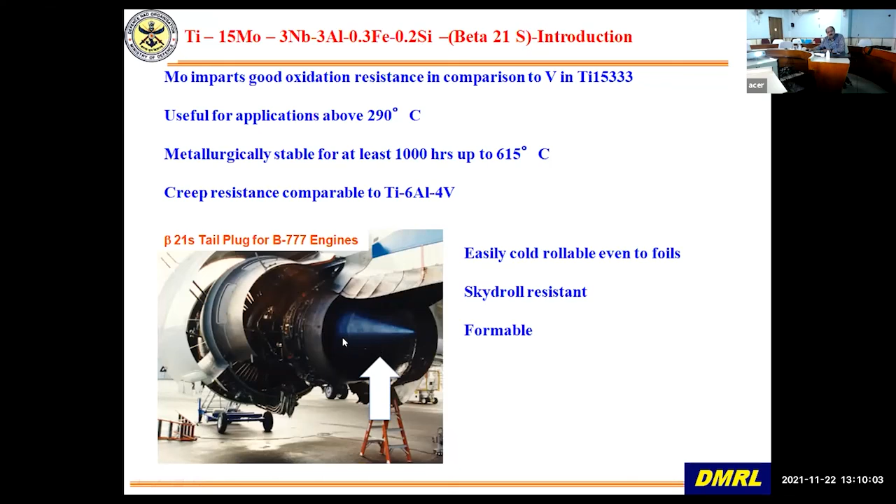So ADA wants this. So we had processed this alloy again with 85 moly 15 aluminium, and we could process it to 0.8 mm thickness in the lab. There was no issue, and we did property evaluation in solution treated as well as solution treated and age condition, both at room temperature and higher temperature, and we were getting good properties.

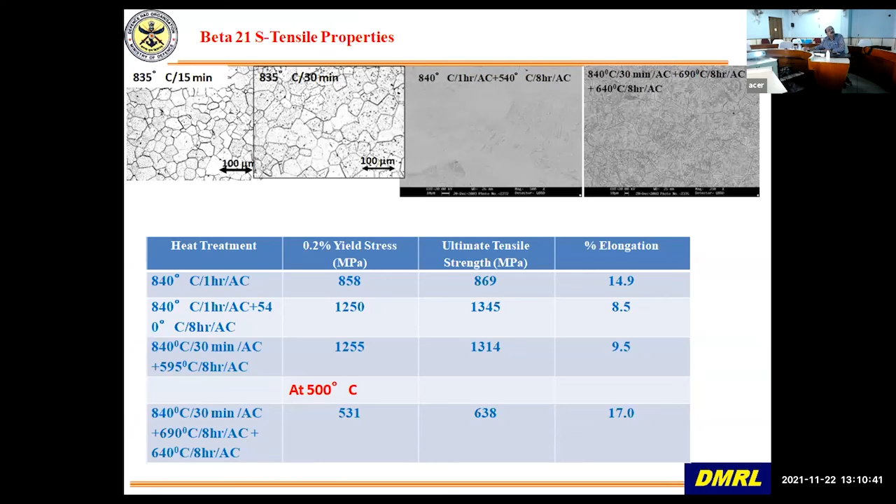This I'm showing you is the aged microstructure at different aging temperatures and the beta treated single phase microstructure. You want this sheet material to be in beta treated form because, for forming certain components. After you form it, you can age it after forming the final component to gain strength.

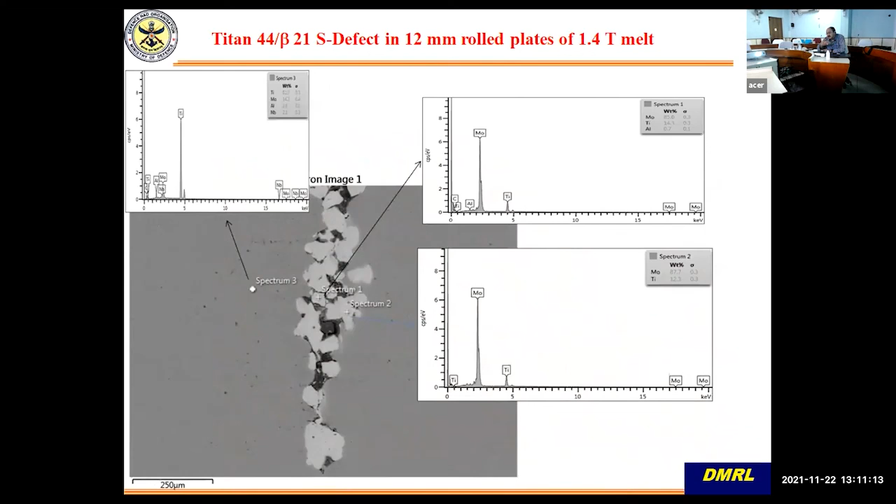So then, but when we started melting on industrial scale, we did not get that 85 moly 15 aluminum master alloy. So we had to go for a master alloy which was only available as 65 moly 35, and we had to use a lot of moly powder. This ingot was processed to 12 mm thick, and then we started getting ultrasonic signals of defects. When we cut and saw, we could see unmelted moly surviving even 2 VAR melts. So the moly did not melt.

So moly is not known to segregate because it's got an isomorphous phase diagram. It is not like iron. So the problem here is the reverse of that of iron. So what we did is we changed the melting procedure. We melted at a higher melt rate, and we changed it to triple melting, so that our melting pool was there for a longer time, so that the moly could dissolve.

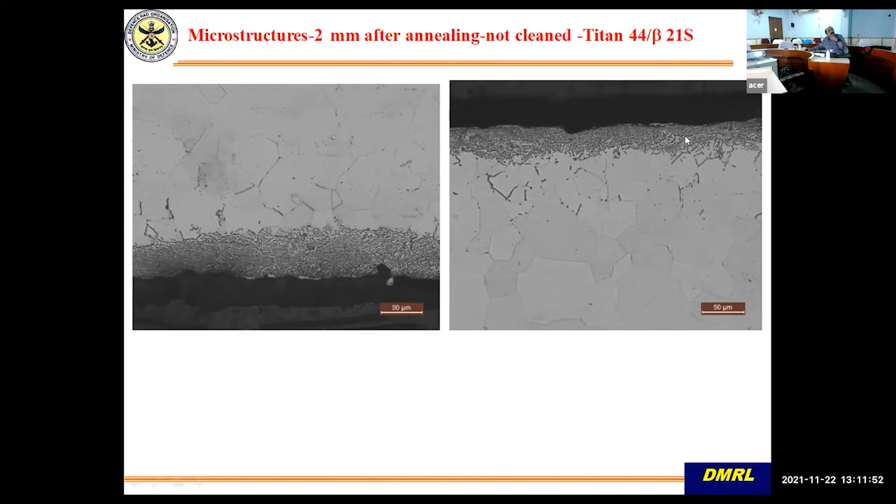And then the other problem was on the sheet, when you heat treat, because we don't have proper atmosphere, you start forming oxide layers which look like this. So that you have to remove by proper procedure, which was removed. Again, your single phase material is beta treated, so that is why you are not seeing any contrast. This is the deeply etched condition, optical.

You can see big beta grains which are there. This is the condition in which it is to be supplied. Then when you age, you get very fine precipitation, big beta grain, very fine precipitation of alpha, and that gives strength. So sheets are made, bend test, cup test, required for sheet applications were done to check the material.

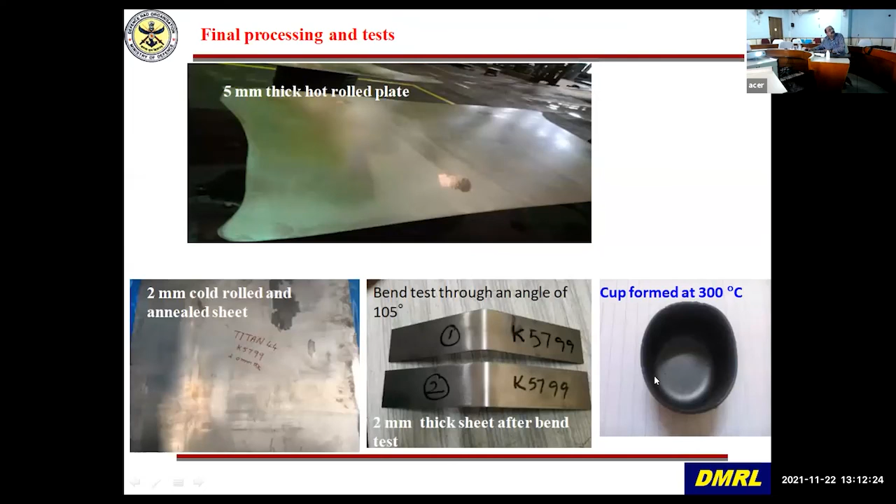The other alloy that we are working on is 5553. This has got higher hardenability as compared to 10-2-3. This is required for higher section size thickness for making bigger components. So we had done a lot of lab scale studies, both in beta treated condition and alpha plus beta deformed, solution treated, in age condition.

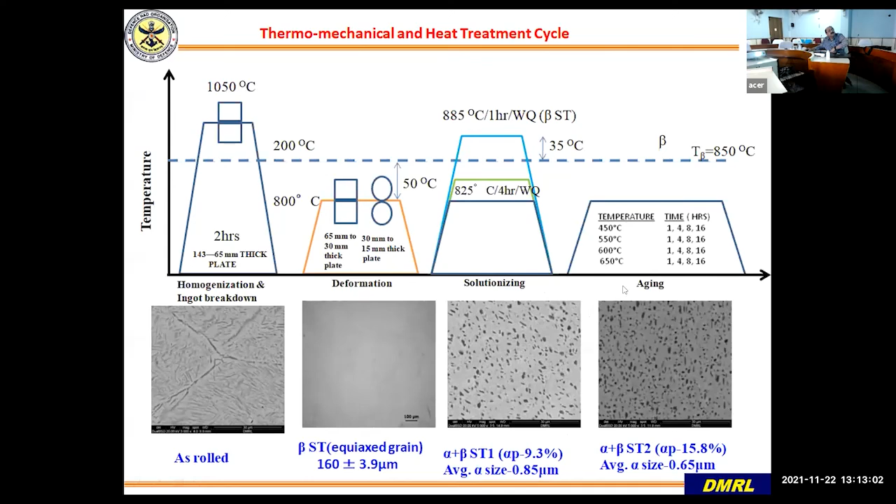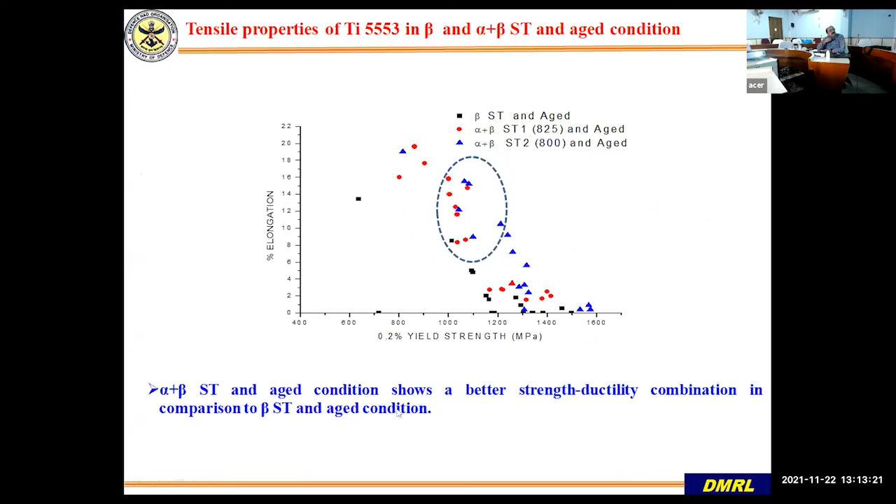This is how it was processed: ingot in beta regime, then alpha beta process, then solutionizing in different temperatures and aging at different temperature. These are the different microstructures which we generated, and we generated a lot of mechanical property data, and alpha plus beta treated material showed good combination of strength versus elongation. So we are now going in for industrial scale melting and processing for the program of ADA.

So I will briefly talk about biomedical application, and I'm coming towards the end of my talk and also the time. Just 2-3 minutes, I'll finish.

So biomedical alloys are again of interest. India does not make these, now we have started. For most biomedical applications, we still use Ti6-4. Ti6-4 has got several problems: it has got cytotoxicity, it has got higher modulus of elasticity as compared to bone. Bone modulus is around 30 to 50 GPa, and this modulus is around 120-130 GPa, so much higher. So there is a problem of stress shielding, etc., and biocompatibility, and allergic reactions.

What is cytotoxicity? This vanadium in Ti6-4 is suspected to promote cancer. Therefore, over a period of time, vanadium was replaced by iron and now niobium, and these are the newer generation alloys which have come up. Still these are old. There are other aluminium alloys that have come up. Aluminium was also suspected to promote neurological problems, so aluminium has also been replaced in titanium alloys. Now some studies are going on, but not much in DMRL, though there are other places where it is going on.

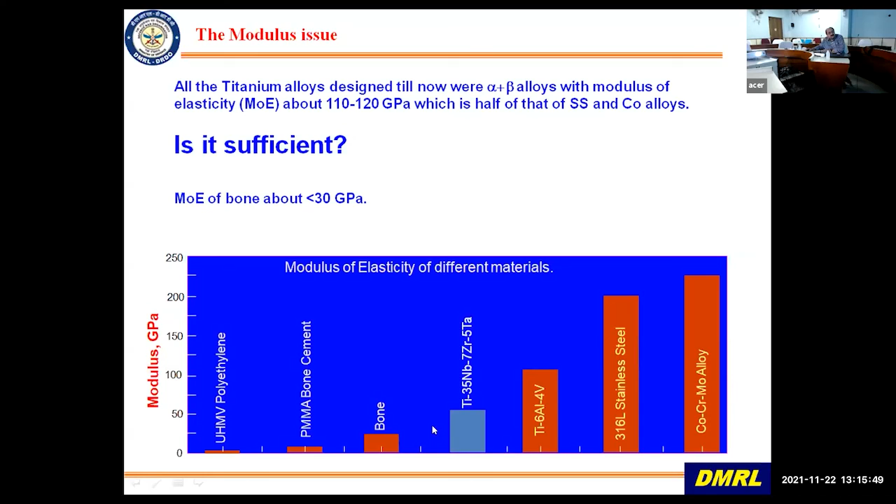This is another newer titanium alloy, 35Nb. This is completely a beta alloy, as you can see, and has got, although we would still like to go lower, there are studies which are on. But it is much lower as compared to other biomedical material which we had earlier.

So there are ways to design this. The material which twins, that forms twins, has got lower modulus as compared to material which deforms by slip, and so on. So people are aiming at that kind of composition, etc. There are certain ways to design these alloys.

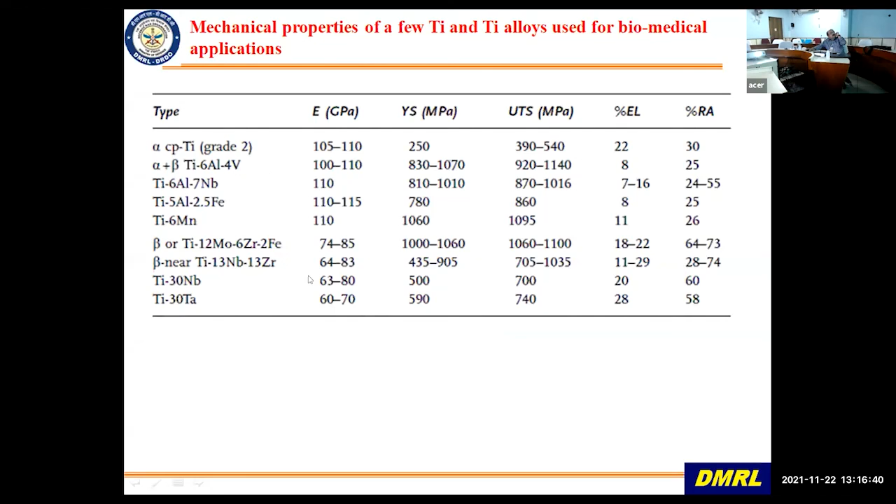So newer compositions are coming up, which will probably, here again I will just show you the comparison of the elastic modulus of CP titanium, Ti-6Al-7Nb, which is near Ti-6Al-4V, yield strength, percentage elongation. You can see these newer alloys have got much lower modulus.